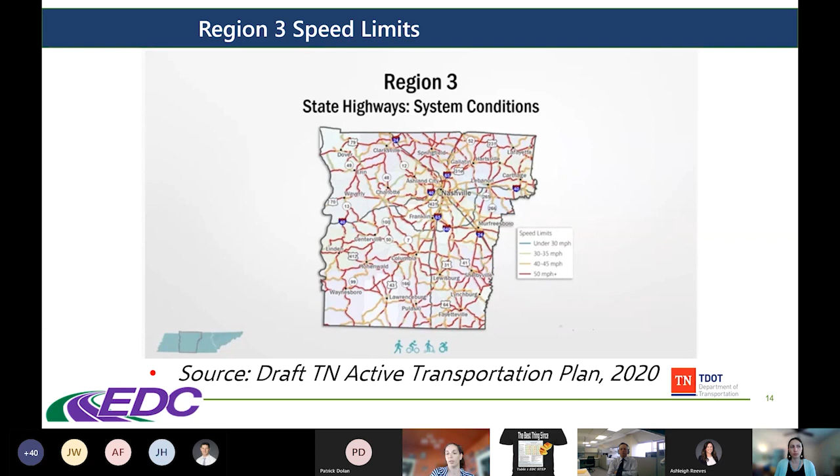TDOT has taken a lot of steps to integrate safety for people who are biking and walking, starting with a multimodal access policy that's been adopted and used throughout the department. It was first adopted in 2010, so about 10 years old now, 10 and a half.

That policy has translated since then into some very specific policies and grant programs, such as the Multimodal Access Grant Program, organized by the multimodal team at TDOT, which gives opportunities to apply for pedestrian or bicyclist safety infrastructure funding at $1 million. The Transportation Alternatives Program was already in place, using federal funding before the Multimodal Access Grant Program, but it's also a really good source for pedestrian safety infrastructure funding, and that is run by TDOT's local programs office.

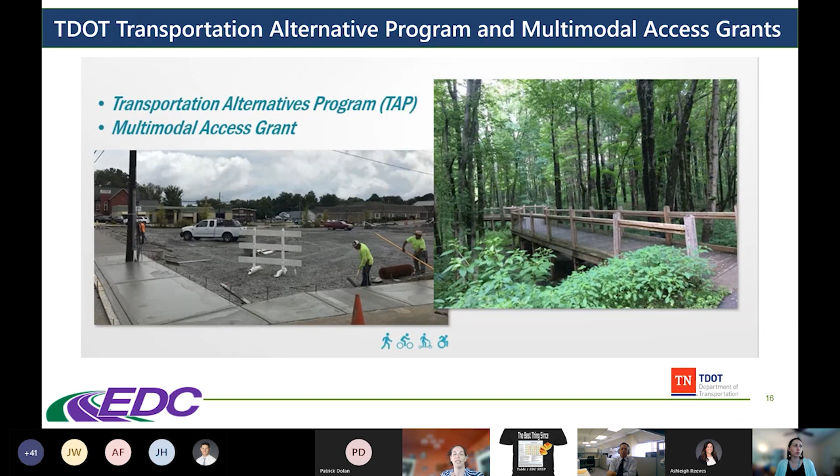TDOT recently, probably 4 years ago, adopted multimodal design guidelines. For every project in development, TDOT staff are looking at bicyclist and pedestrian needs on each and every roadway to determine the appropriate infrastructure for walking and bicycling, and add those into projects from the beginning, which has really made a lot of improvements in the projects coming out from TDOT from the start.

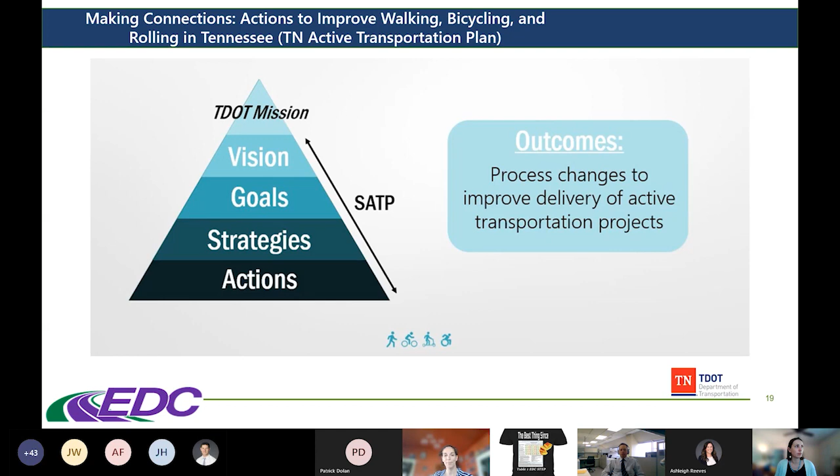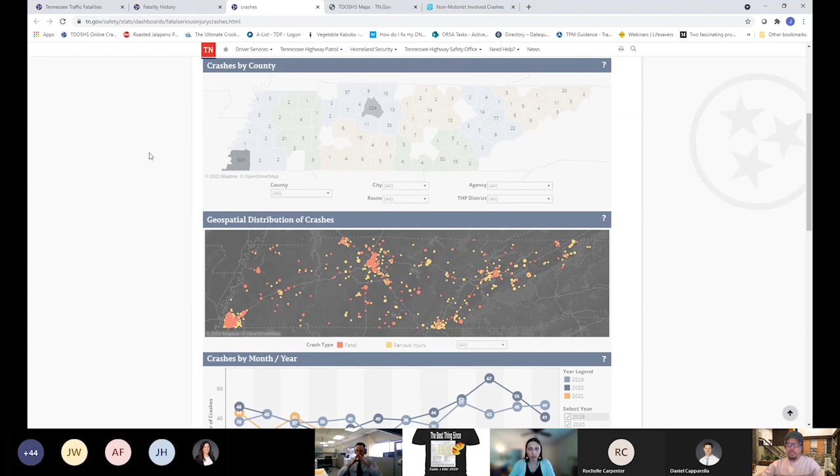So here you can see the distribution of crashes across the state. Again, this is just fatal and serious injury crashes, but you can see they're pretty widely distributed in the rural areas, and concentrated mainly in the urban areas, almost 50%. A little over 48% of the non-motorist crashes occur in Shelby and Davidson counties.

As far as when the crashes are occurring, the trend for 2020, the dark line here, looked a lot like previous years, except in the fall the typical increase was even greater than usual. 2019 looks like a very typical year - the trend stays flat, ticks up through summer and fall, then jumps back down in winter. It remains to be seen how 2021 is going to play out.

February was good to us because we had two ice storms or snowstorms in February. So there was a spate of bad weather in January and February that kept our overall crash numbers from being higher.

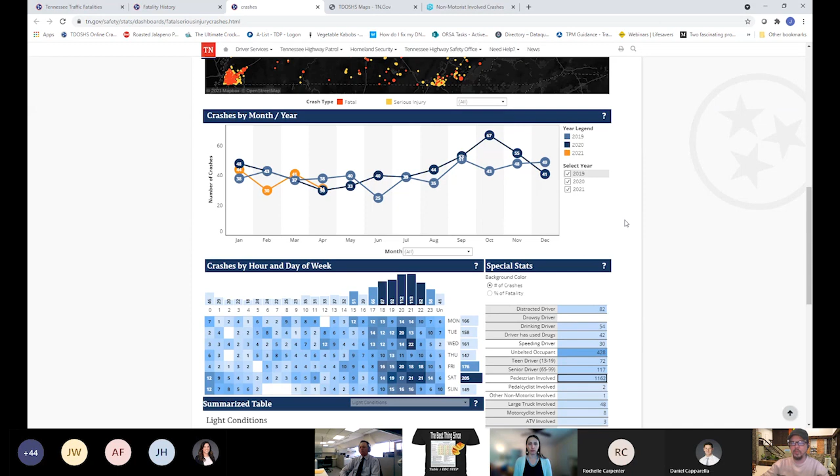You can see by time of day and day of week that most pedestrian crashes occur late in the day and late in the week. That hasn't changed a lot in 2020, though the pandemic changed these trends a little bit.

In 2019, you would have seen a little bit higher uptick in the morning hours between 7 and 9 during rush hour, but the morning rush is almost gone compared to what it used to be. So the evening hours have really been the focus of these crashes lately.

You can see that Friday and Saturday are the highest days, but there are some pretty big chunks on Tuesday and Wednesday where we've had a lot of pedestrian crashes that were fatal or serious injury crashes. I've filtered here at the pedestrian involved, so we're looking at a total of 1,162 crashes.

Some of the other statistics involved in those crashes - distracted driver is fairly high, with 82 of these crashes involving a distracted driver, and 117 involving a senior driver. We've seen that tick up again as folks are getting vaccinated and being able to drive. Senior drivers are becoming more involved in crashes than they were in 2020.

In 54 of the crashes, the driver had been drinking, and in 42 the driver had used drugs. There's some overlap there, so it's not 66 or 96 combined drug and drinking crashes, but there's a pretty big involvement of alcohol and drugs on the driver's part in these crashes.

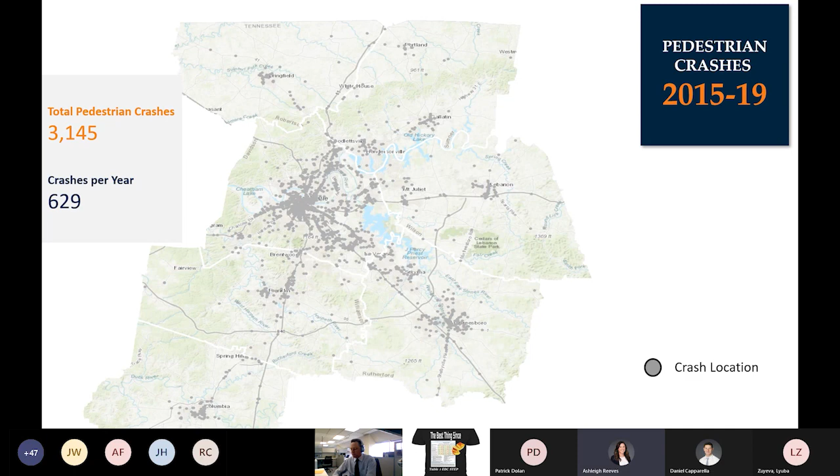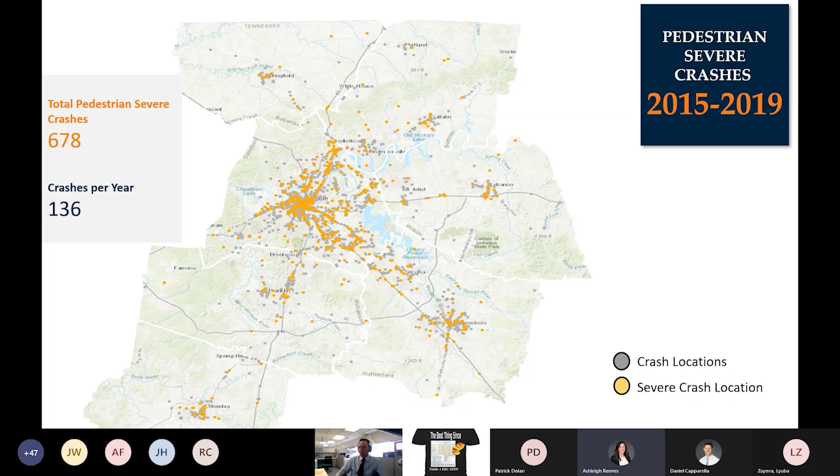Here we're looking at 2015 to 2019, and we're looking at severe crashes, those that resulted in a serious injury or fatality. In those 5 years, we had a total of 678 severe pedestrian crashes, roughly 136 per year. Let's go to the next slide.

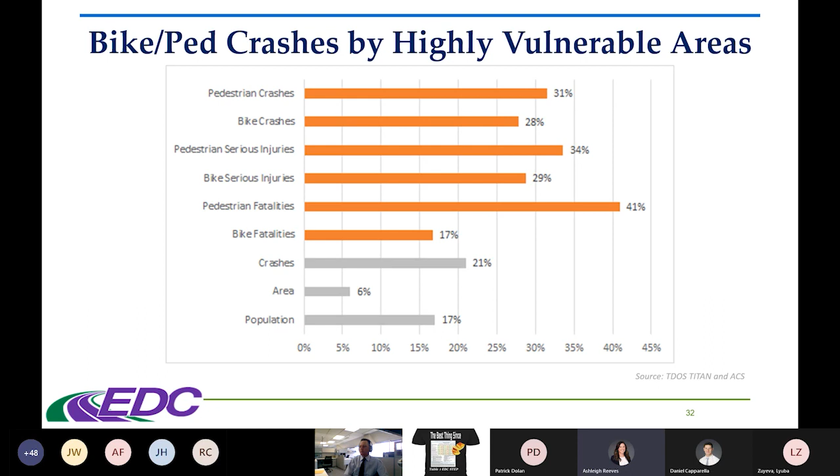And if you go to the next slide. This graph really highlights how pedestrian and even bike crashes occur in areas that are highly vulnerable. HVAs account for 6% of the area in the region, but yet over a third of pedestrian crashes occur in these areas, and over 41% of fatalities. Of the factors included within the HVAs, disabled, racial minority, carless, and poverty contain the largest percentage of pedestrian crashes, respectively. And if you go to the next slide.

We also took a look at proximity to transit stops, and as you can see, there was a disproportionately high number of bike ped crashes occurring within 500 feet of a transit stop.

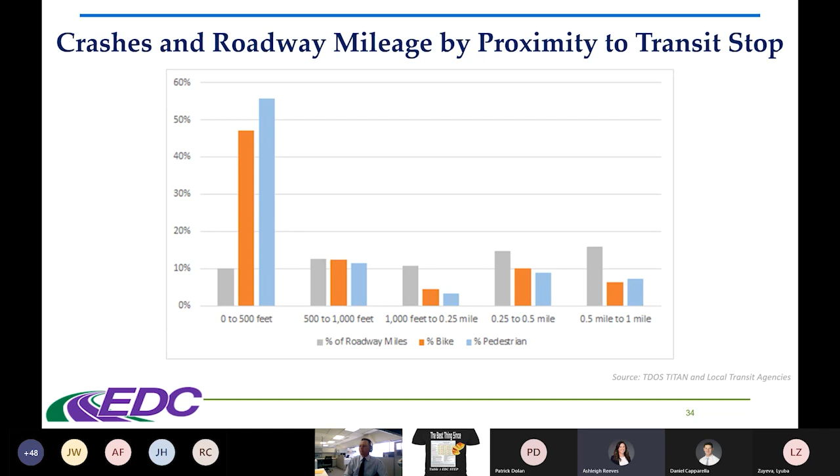We also took a look at functional classification and bike facilities, among a number of other things. We're just highlighting a couple right now. And we found something very interesting that seems to obviously work.

I think I'm turning it over to Daniel to go over some of the safety programs within our region. Thank you, Ashleigh. So you can move on to the next slide.

I'll start by introducing our Bicycle and Pedestrian Advisory Committee, or BPAC. We reconvened our BPAC back in January of 2020 in the midst of our regional transportation plan update. We've met almost monthly since, and it's really turned into a forum for anything active transportation related. We've got planners and elected officials from a few of our local governments, representatives from transit agencies, law enforcement, and advocacy groups for bike ped users and the disability community.

A typical meeting usually consists of discussion of regional and local crash analyses, such as the trends that Ashleigh just discussed, feedback on local, state, and regional bike and pedestrian plans and activities, and we spend a lot of our time collaborating on strategies to address regional active transportation issues.

We adopted our long-range regional transportation plan back in February of this year, but we spent the last year and a half updating and analyzing bike and pedestrian conditions and trends to understand the most important issues and needs for people walking and biking in the region. To do that, we collaborated with the BPAC on what we called BPAC priority areas, which identified where we should be investing in active transportation improvements. The BPAC weighed safety as the most important factor, with health disparities, demand, comfort, and congestion also factoring into the priority areas.

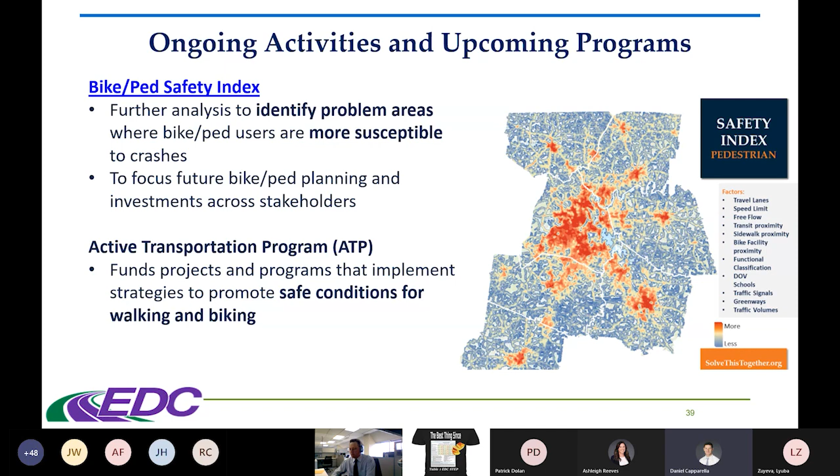As part of our RTP, we also have a grant program called the Active Transportation Program, which funds projects and programs that promote safe conditions for walking and biking. This is funding set aside each RTP cycle, and we hope to have a call for projects this summer for that program, and also hope to use the safety index to help us prioritize projects for that program.

Finally, I'll highlight some of the great work being done locally in our region. Sumner County, for example, recently received funding through the Community Transportation Planning Grant Program facilitated by TDOT for a countywide bike and pedestrian master plan.

Metro Nashville is the first city in the state to do a Vision Zero plan, which they kicked off about a month ago. We hope that plan will set a precedent that pedestrian fatalities are preventable and give us a roadmap for how to move forward with that initiative.

WeGo, Nashville's transit agency, released their Better Bus Plan last year, which includes funding for bus stop improvements and the pedestrian infrastructure associated with them.

In terms of pedestrian safety policies, Nashville and the city of Hendersonville are two of our local communities who have complete streets policies in place, but we know that's something our region needs to work on to encourage the majority of our communities to adopt complete streets policies.

In terms of dedicated funding and local investment in pedestrian safety, WeGo analyzed pedestrian crashes in relation to their bus stops across Nashville and is investing in bus stop improvements to their plan to make it safer for pedestrians to access transit, which we saw was a huge issue from our research across the region.

This has turned into individual projects such as the Nolensville Shelter Project, a location our index also identified as dangerous. Our region has a need for more dedicated funding, especially for pedestrian safety, and that's why we're excited for this workshop so we can start implementing some of these countermeasures and other solutions to improve pedestrian safety across the region. That's all we've got from the regional perspective, and I'll hand it back to Lyuba to continue the presentation.

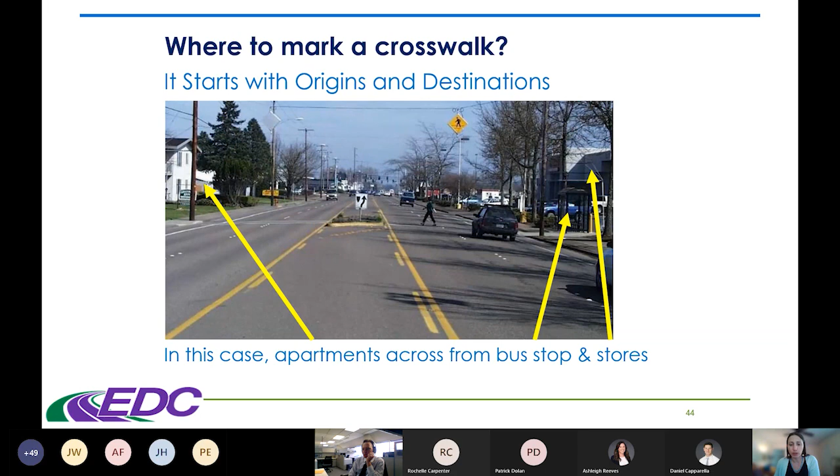So when thinking about where it would make sense to mark a crosswalk, thinking about pedestrian trip generators and activity centers and nodes really helps identify the appropriate pedestrian paths and locations to mark a crosswalk. In this example, we see an apartment complex on one side, a grocery store on the other side, and bus stops. It seems like a pretty logical spot - if you have people trying to get from the apartments to the grocery store, or to the bus stop, anytime a person rides the bus they have to cross the road, either on one leg of their trip or on the return leg. That helps identify potential crossing locations that would make sense to stripe a crosswalk.

We also have to think about human nature. Just because there's a signalized intersection with a marked crosswalk nearby, it doesn't always mean the pedestrian is going to use that location. A lot of times human psychology prefers a clear line, a clear path for walking trips, and also tries to take a shorter trip. It could take an extra 5-10 minutes for a pedestrian to walk out of their way to get to the signalized intersection, where they might also face other conflicts from drivers taking a left or right turn. So there's this perception that you're walking further out of your way to get to the signalized crossing, and you might still not be much safer as a result.

Generally, if a pedestrian sees a clear line of sight and it looks like there's not too many cars, they might spot a good break in traffic. A lot of people will tend to go ahead and take the risk and cross, even if there's not a signed crosswalk. In reviewing some of the data earlier, you've seen there's a preponderance towards males being involved in injury crashes, pedestrian crashes.

So again, just human nature, not just guys, right? Women do too, but sometimes when we see a clear path, clear line of sight, that's where the human mind gravitates towards trying to cross there.

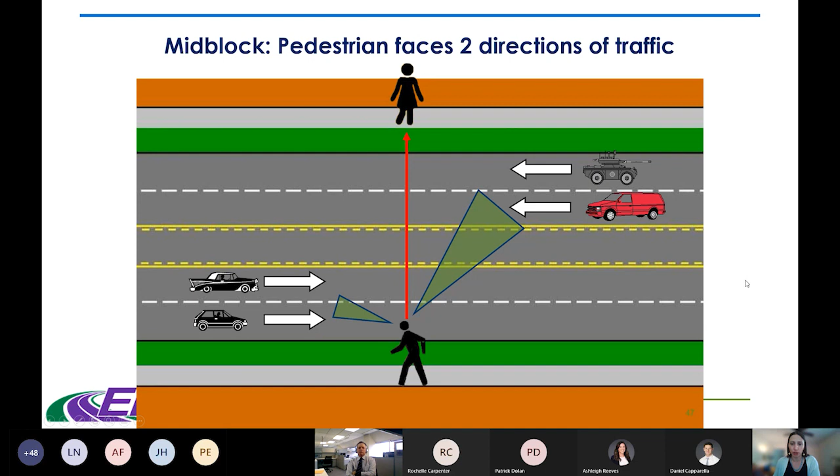This slide illustrates some of the conflicts and threats a pedestrian has to evaluate when navigating a mid-block crossing. In this case, we're dealing with a 5-lane arterial with a 2-way left turn lane. For a pedestrian, it's a challenge to pay attention in both directions - they have to look left, look right, and find a break in traffic that accommodates their trip in both directions. So there's that mental challenge of navigating conflicts from both directions.

But if you think about a pedestrian trying to cross at an intersection, there are going to be some conflicts too. A pedestrian has to pay attention to cars that might be turning right in front of their path - they might not see them right away. They also have to pay attention to vehicles turning left in front of their path and not seeing them immediately. So some of those can also be a challenge, even though there might be a pedestrian signal phase and pedestrian crossing markings.

Going back to 2005, there was research published that looked at the effects of marked versus unmarked crosswalks at uncontrolled locations. They primarily looked at both 2-lane and multi-lane roadways, and also looked at differences by speed, number of lanes, and median versus no median. For 2-lane roads, there was no significant difference in crash rate at marked versus unmarked crosswalk locations. On multi-lane roadways with 3 or more lanes, there was a difference based on traffic volumes and presence of median.

So looking at multi-lane roadways under 12,000 vehicles per day, there was no significant difference in crash rate between marked versus unmarked crosswalk locations. Over 12,000 vehicles per day without a median, crashes at marked crosswalk locations exceeded crashes at unmarked crosswalk locations. And over 15,000 vehicles per day with medians, crashes at marked locations also exceeded crashes at unmarked crosswalk locations.

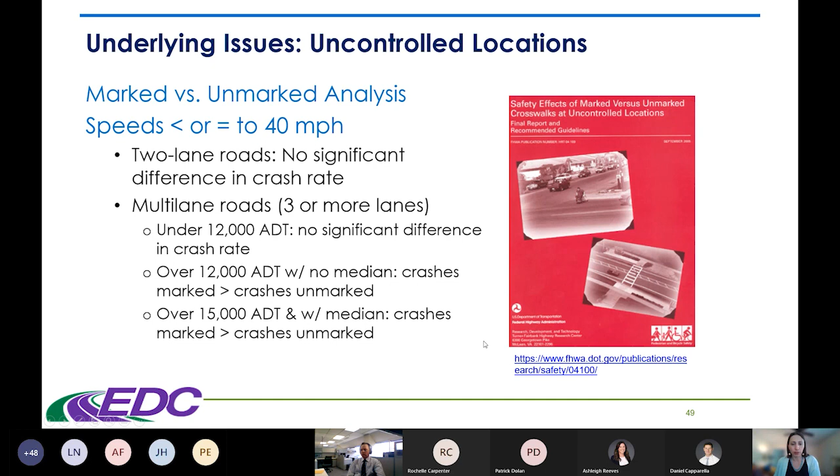There's also an underlying factor that might be involved in this increased crash rate, and that has to do with multiple threat crashes. What happens is if there is a marked crosswalk, the driver in the right lane might stop for the pedestrian crosswalk, but the driver approaching in the next lane might not be able to see the pedestrian behind the stopped vehicle, and might not realize that the vehicle in the right lane is stopped for the crosswalk. They're likely to proceed, and then they'd be nearing the crosswalk right around the same time as the pedestrian is getting to that point in their crossing. So this multiple threat crash situation does occur. There are ways to remedy it with advanced stop line or advanced yield markings, and we'll talk about it more in the future.

Rochelle talked a bit earlier about travel speeds and the effect on survival statistics. In addition to having an impact on how likely pedestrians are to survive crashes, travel speed also makes a huge difference for stopping sight distance. If a driver is traveling faster, they're going to need a lot more distance to have the full length to react to seeing a pedestrian or seeing the crosswalk markings, start applying the brakes, and actually come to a reasonably complete stop.

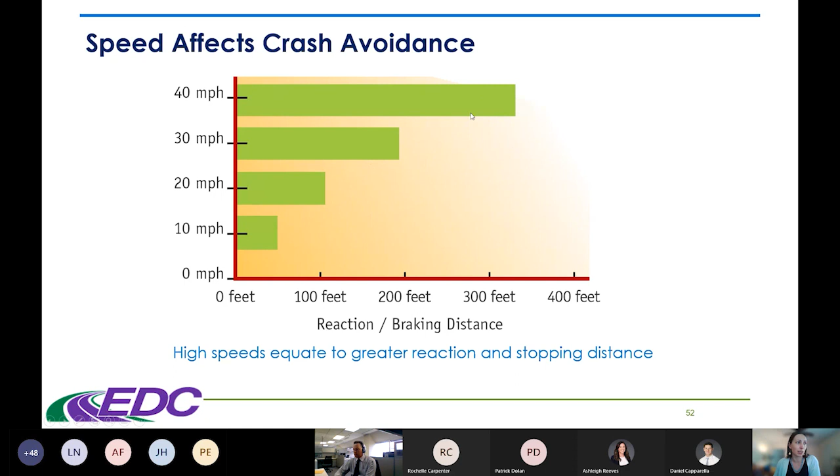So when you're talking about 20 miles per hour, it might take 100 feet to fully react to a crosswalk or a pedestrian in the crosswalk and come to a full stop. And at 40 miles per hour, you're looking at almost 350 feet for the full reaction braking distance. This longer distance means we need a lot more additional supports on multi-lane high-speed arterials where drivers are likely traveling at higher speeds. We need to give them a lot more warning so drivers know something's coming up and can react in time. Otherwise, it's just not enough distance if they only see the warning sign right in front of the crosswalk and it doesn't give them enough notice to start reacting 350 feet up the road.

The Manual on Uniform Traffic Control Devices does have some guidance on signing versus non-signing crosswalks. There's not a warrant required to add marked crosswalks. However, there's some guidance that suggests that in some situations, a marked crosswalk alone is probably not sufficient.

The specific language indicates that marked crosswalks alone, without other measures designed to reduce traffic speeds, shorten crossing distances, enhance driver awareness of the crossing, and/or provide active warning of pedestrian presence, should not be installed across uncontrolled roadways where the speed limit exceeds 40 miles per hour and/or either those roadways have 4 or more lanes without a raised median or island and an ADT of 12,000 vehicles per day or more, or 4 or more lanes with a raised median island and an ADT of 15,000 vehicles or more.

So that kind of reflects back on that study from 2005 that we've also referenced. And again, this guidance from the MUTCD does not suggest that it's not important to mark a crosswalk, but it does suggest that in some locations and situations, additional safety measures are needed. So as part of the STEP workshop, we'll be reviewing those 7 countermeasures that provide additional potential elements to help enhance the conspicuity of those crosswalks, make them more visible to drivers, and give drivers more opportunity to see them in advance, react, and come to a complete stop.

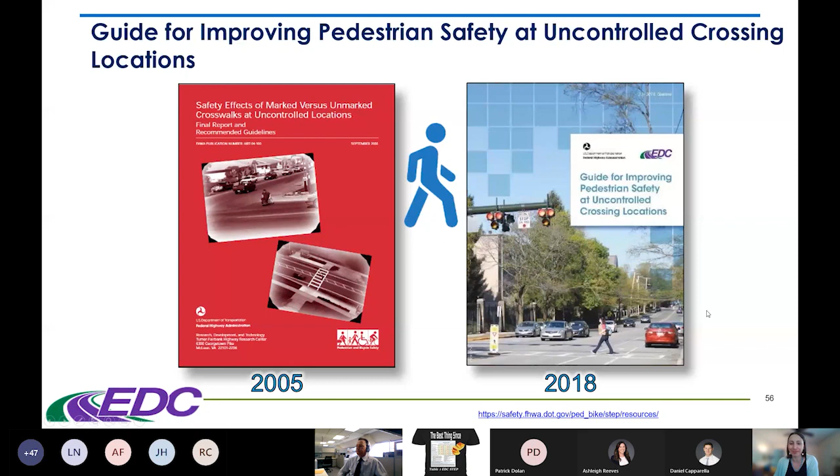In addition to this lovely Table 1 with countermeasures, the guide also walks you through the process of selecting the best countermeasures. Similar to many planning processes, you would start by collecting the data. Next we're going to review some of the steps involved in identifying and selecting the most appropriate countermeasure for a given situation.

Step 1: collect the data and engage the public. Of course, you want to look at your pedestrian crash and safety data, and it sounds like the MPO has already done a lot of that work for your region. You also have the dashboard interactive tool available for the state of Tennessee. So if you're with a local municipality in this region, you already have access to some of those great tools and resources. And if you need to look at your crash statistics, you can go find the data.

You'd also want to evaluate your pedestrian accommodation policies, what's happening with locally adopted plans and zoning regulations. You could consider initiating a pedestrian safety action plan, which could be done at a regional or municipal level. You probably also want to review your pedestrian traffic safety plans.

As an optional tool, you could also conduct a walkability audit, bringing a group of professionals out into the field, preferably in interdisciplinary teams so a variety of perspectives are represented, and actually walking the corridor to look at the location on the ground. Sometimes you can really see in real life features and details that are less obvious from a Google Street View review—maybe a bush obstructing visibility for drivers, a lighting issue, or something else that's harder to read just from looking at aerial views.

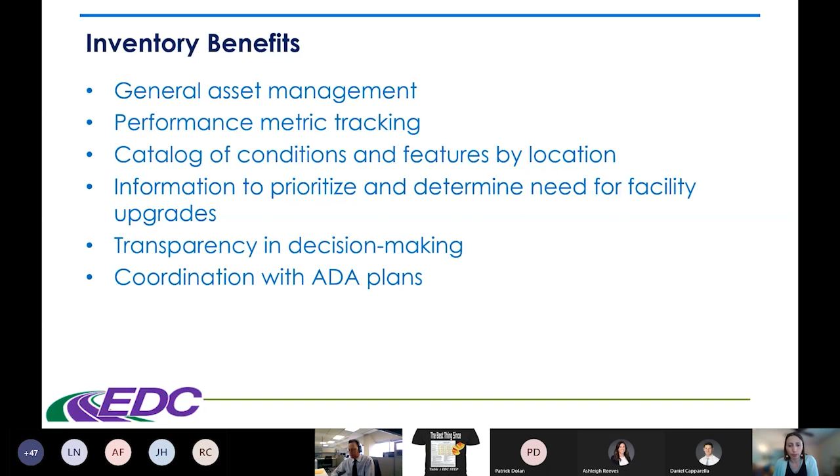Maybe if you already had some sort of beacon or rectangular rapid-flashing beacon, there's some maintenance issue with the lights not flashing correctly. So having a good inventory provides you with that baseline analysis, and you can keep track of it over time better.

If you don't already have a local, regional, or statewide inventory applicable to your location, and you're trying to collect data from scratch, the STEP field guide could be a helpful resource, providing specific questions you'd want to ask and address as part of collecting your data. It asks about land use context, location, nearby destinations, roadway features such as speed and volume, crosswalk features like markings, signs, beacons, and signals.

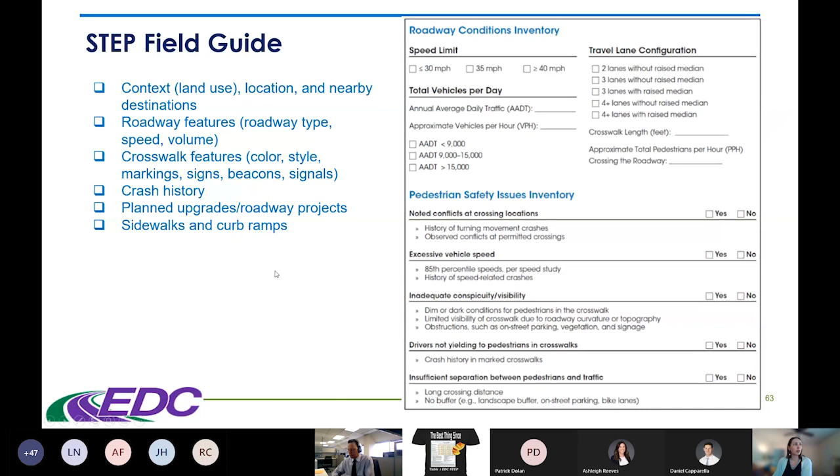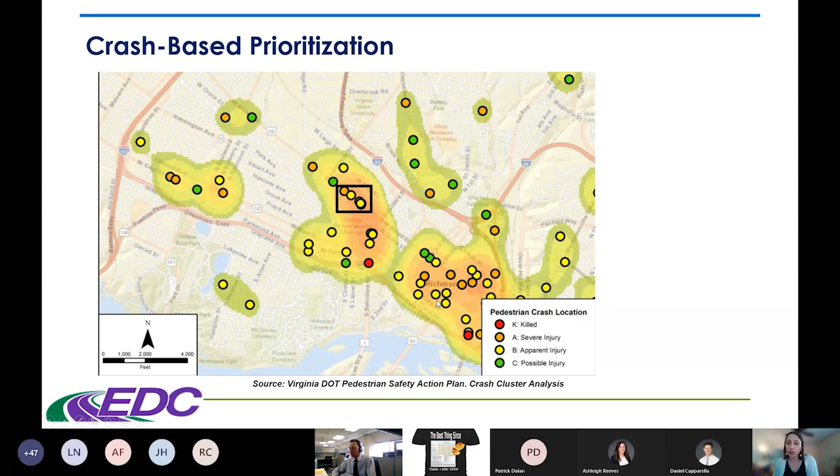Once you have your data analyzed or compiled, you can look at prioritizing your spot locations based on crashes. This map illustrates a heat map that helps identify concentrations, those priority areas based on fatality and severe injury crashes. Here, red dots are fatalities and orange dots are severe injury pedestrian crashes, for example, from Richmond, Virginia. You can see how certain locations and corridors tend to pop up once you do this heat mapping of pedestrian crashes.

We'll talk a little more about the systemic approach to safety. It sounds like this has already occurred in this region, so kudos to the local team. There's a great guidance document out there, NCHRP 893, that you can download online if you want to do more systemic pedestrian safety analysis. Systemic improvement is generally widely implemented based on high-risk roadway features that are correlated with particular crash types rather than crash frequency. The systemic approach is more proactive, risk-based, data-driven, and is a process.

Similar to the countermeasure selection process we've discussed, the systemic approach to safety has its own series of 6 steps, somewhat similar but a little different. You start with defining the study scope - are you looking at the whole region, just a county, a city, or a particular corridor? Then you would compile your baseline data.

You look at determining the risk factors, which often involves statistical analysis. If you haven't done this type of data analysis in the past, it might be helpful to recruit researchers experienced with statistical analysis, maybe partnering with your local university. The next steps would be to identify potential treatment sites, select potential countermeasures, and then refine and implement the treatment plan.

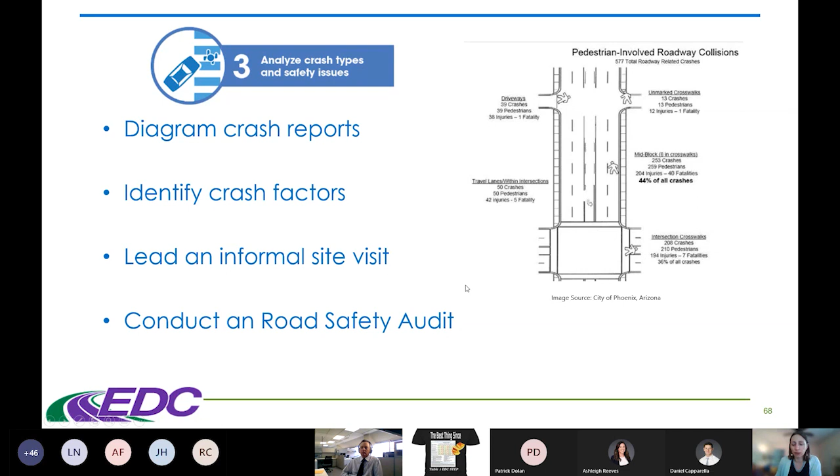With the road safety audit, there's additional guidance available from Federal Highways that identifies some typical steps. You'd start with formulating your RSA team, but also identifying who's actually the project owner—is the local municipality the agency driving this roadway safety audit? Is it the MPO? Is it the DOT? Who is in charge, basically? And then who's involved in this team?

You identify specific projects that you're looking at, set up a starting meeting, and then perform the field review, analyze report and findings, present those findings to the project owner, prepare a formal response, and incorporate findings.

One of the advantages of doing a formal RSA is that even as a formal process, it can still be relatively quick, done over the course of 2 to 3 months. So you end up with a concise document that indicates safety issues, and the recommendations for addressing them can be easily folded into your future planning processes.

For example, if the MPO is updating the long-range plan, or the municipality is updating its comprehensive plan or bicycle and pedestrian plan, you can look at the RSA findings and incorporate them to help prioritize projects in those regional and local plans. So RSAs can be done relatively quickly and can be a helpful additional part of the process to identify needed countermeasures for a particular location.

All right, so moving on. Once you've selected your countermeasure, there's a variety of design guidance to help you actually design this particular treatment. The MUTCD, of course, is in the process of being updated, and there might be some small changes, for example, related to pedestrian hybrid beacons. But right now, the MUTCD is what it is. I believe the latest version is from 2009, so it has parts to deal with signage, markings, highway traffic signals.

You also have the AASHTO guide for the design of pedestrian facilities. And then there's a variety of other guidance documents such as PedSafe, Guide for Improving Pedestrian Safety at Uncontrolled Crossing Locations, which is what we're reviewing through the training today, and some additional guidance. Out of those guidance materials, the MUTCD can be downloaded for free.

The AASHTO guide does require a fee to download and use, but hopefully if you have a group of professionals who are going to be using it in your office, ideally it makes sense to have at least one version for the group to share. I think with electronic resources it's getting tricky too, you kind of have to have a different license for each user.

But there's a view of some of those additional guidance materials that are available from agencies such as Federal Highways, NHTSA, AASHTO, ITE, PBIC - Pedestrian Bicycle Information Center. For example, there's a pedestrian safety guide for transit agencies. As we've already talked about today, there does seem to be this link between bus stop locations on multi-lane arterials and prevalence of pedestrian crashes. Tends to be one of those safety issues.

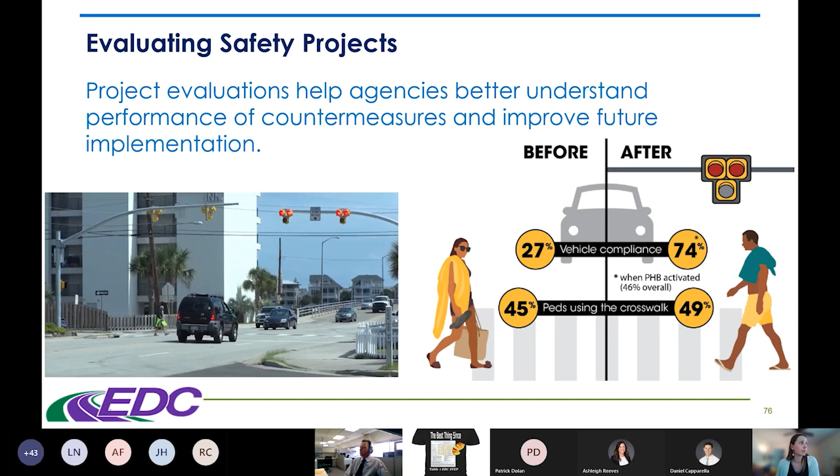All right, so that brings us to the next section where we're going to be talking about those specific seven countermeasures, the spectacular seven as they're sometimes referred to. I want to take a break and see if there are any comments or questions that have emerged. Does anybody have a burning question or a comment you'd like to share based on everything you've heard so far? Any locations that jump out to you and say, hey, do something here, this is really a hot spot? Feel free to add a chat box comment or speak up if you have any particular thoughts you'd like to share with the group before we jump into the next section.

Luba, there was a question about the MUTCD update, helping to simplify the crosswalk application. I'm not sure if you saw that or not.

Yeah, the MUTCD is kind of a moving target right now. Peter, I'm not sure if you'd care to add a comment about the MUTCD changes, since there's just so much there. Yeah, and since it is under the notice of proposed amendments right now, we can't say too much, but I think the question was really more that I needed some clarification on exactly the crosswalk applications. Sounds like they're wanting to simplify it, so I needed a little more detail. Ross, if you want to maybe just quickly describe a little more of what you're trying to say or ask, because right now it is engineering judgment as far as the crosswalk placement, whether you put in a crosswalk or not. Maybe you can give us a little clarification on the question.

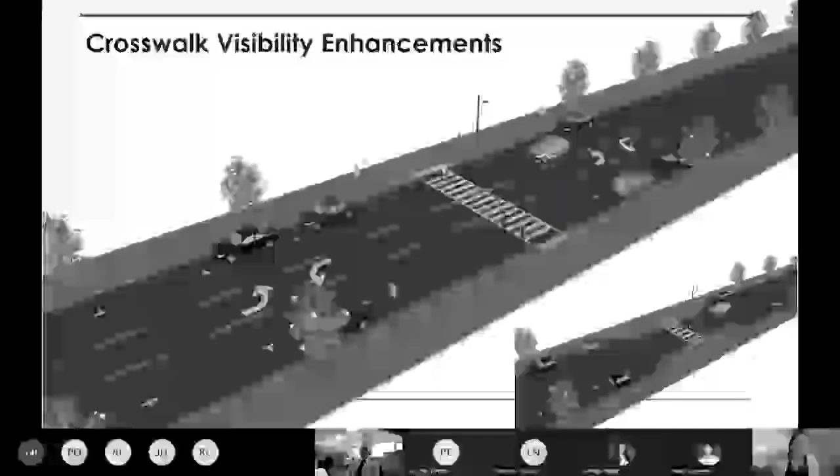This graphic illustrates some of those elements we've already talked about. Again, you have the continental style crosswalk markings across the crosswalk. You have the pedestrian crosswalk warning sign right here with an arrow pointing to where the crosswalk is. You have the pedestrian scale lighting, one on each side — not directly over top of the crosswalk, but rather to the side.

You have this area that's protected from parking on both approaches to make sure drivers are not parked and obscuring the crosswalk from the driver. And then down below in the smaller graphic, you'll also see an example where there is a curb bulb-out situation that also helps shorten the pedestrian crossing path and makes the crosswalk even more visible to the driver.

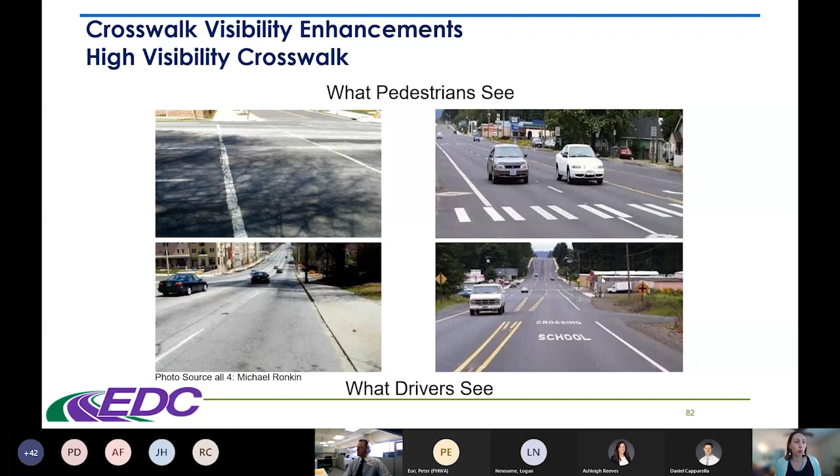Pedestrian warning signs used to be yellow, and more recently fluorescent green has been recommended for more visibility. These pedestrian warning signs may be used to alert road users in advance of locations where unexpected entries into the roadway might occur, or where shared use of the roadway by pedestrians, animals, or equestrians might occur.

This deals with a situation where drivers need a little more advanced notice. Just having the warning sign at the crosswalk location itself isn't sufficient based on higher speeds, or maybe they're going around a curve and something is obscuring their line of sight to the crosswalk. In that case, you can add an advanced warning sign before the driver gets to the crosswalk, with a flag that says 'ahead'.

Advanced yield markings are another feature that can help support crosswalk safety by reducing multiple threat crash likelihood. Advanced or 'stop here' versus 'yield here' for pedestrians in crosswalks varies state by state. In Tennessee, I believe you're in a yield-to-pedestrians-in-crosswalk state, so a 'yield here to pedestrian' sign would be used to support the shark's teeth markings for advanced yield to pedestrian crosswalks.

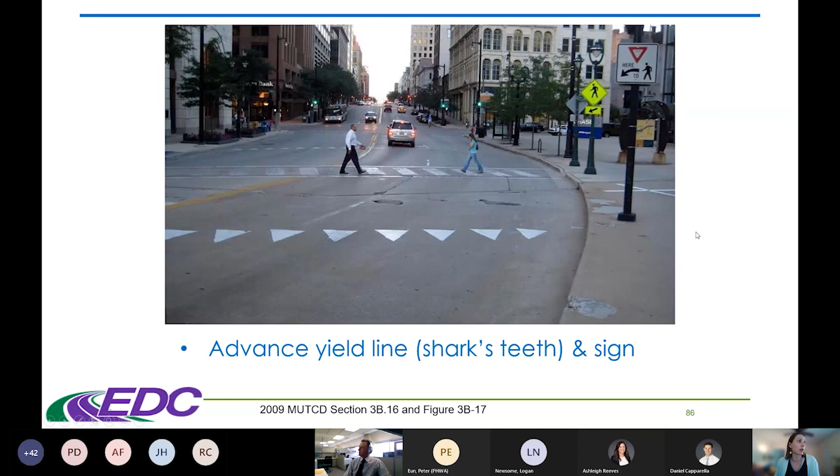This is an illustration of what advanced yield markings look like. The shark's teeth applied to the roadway, then you have the yield-here-to-pedestrian sign, plus an additional warning sign with an arrow right next to the crosswalk, continental stripes, and some pedestrian scale lighting. All of these features in combination can make the crosswalk more conspicuous and easier for drivers to see.

In-street pedestrian signs, depending on state law, use a yield-to-pedestrians or stop-for-pedestrians sign—here it's yield to pedestrians in crosswalk. They go in the middle of the road, and are designed to be breakaway unless you have a median island, since otherwise they're physically elevated out of the roadway space at grade. You have to think about maintenance issues, since breakaway signs will likely need replacing over time, but they're a relatively inexpensive treatment that's effective at improving crosswalk visibility and safety.

Curb extensions, as already mentioned, can also contribute to crosswalk visibility and make the crossing experience more comfortable for pedestrians. In this case, the width of the parking lanes was utilized to create this bulb out, which also gives you a nice area for street furniture, maybe bicycle parking or a bench, and parking would stop on approach to the curb bulb out. If you have a bike lane, make sure the pedestrian curb bulb out doesn't obstruct it—the bicycle lane should still have clear right of way.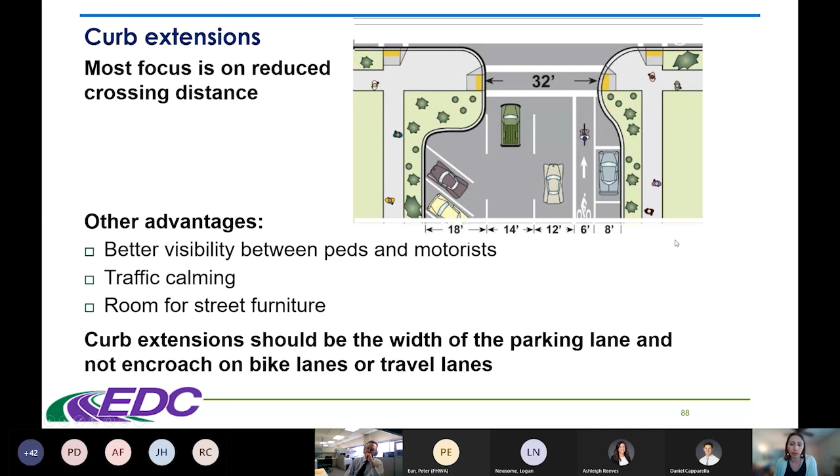In some cases, putting in a curb bulb out is simply not appropriate for that location. In that case, you can still improve crosswalk visibility by removing parked cars on approach to the crosswalk. This blue car can obscure the driver's line of sight, so you would mark that area in advance of the crosswalk as a parking restriction.

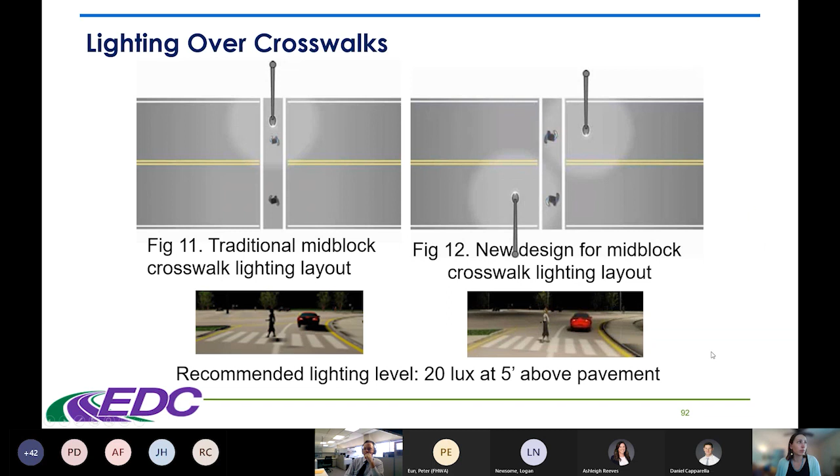This high visibility crosswalk can be paired up with any number of the other pedestrian countermeasure improvements we'll be reviewing today. So the next improvement we'll talk about is a raised crosswalk. A raised crosswalk can be quite successful, but it's not appropriate for all locations.

With a raised crosswalk, the pedestrian walkway stays in line with the sidewalk, and it elevates the roadway for the driver—so the driver has to come up to a higher elevation, then come back down across it. It's almost like a speed table, this elevated or raised crosswalk.

You'll still see warning strips on approach to the crosswalk. It's important for a visually impaired pedestrian to determine that they're actually leaving the safe sidewalk space and stepping out into the road—even though the crosswalk is elevated, they're still effectively stepping out into the road. So it's important to alert them with those pedestrian warning strips. You still have some high visibility crosswalk features too, with warning signs, in-roadway signs, and pedestrian scale lighting.

So some of the other features still apply. Something to note for raised crosswalks is that they're not appropriate for all locations and situations. They're more appropriate for lower speed 2 to 3 lane roadways where speed limits are 30 miles per hour or less, with vehicular volumes less than 9,000 vehicles per day. So it might be a minor collector or more of a neighborhood street, maybe with schools or other neighborhood destinations where people are trying to cross, not a high-speed multi-lane arterial situation like some of the other countermeasures.

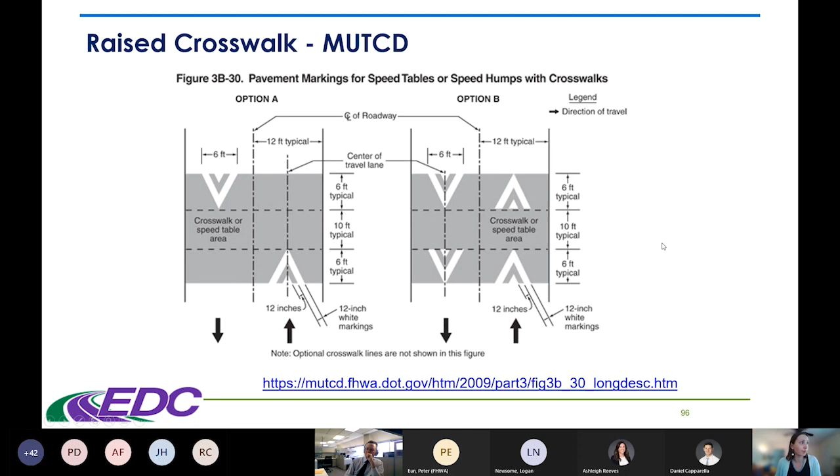The MUTCD has specific guidance regarding the signage and markings with the raised crosswalk, including how to implement chevrons and the width across the top of the crosswalk table, about 10 feet. All that information is available in the MUTCD.

Again, as already mentioned, you'd want to consult with emergency responders in the area, and think about whether there's a consideration for snow plowing or other maintenance issues that might come up. Drainage could be a consideration too—are you going to need additional drainage features installed as part of this raised crosswalk? And there's a concern that several raised crosswalks in succession could be quite disruptive to traffic.

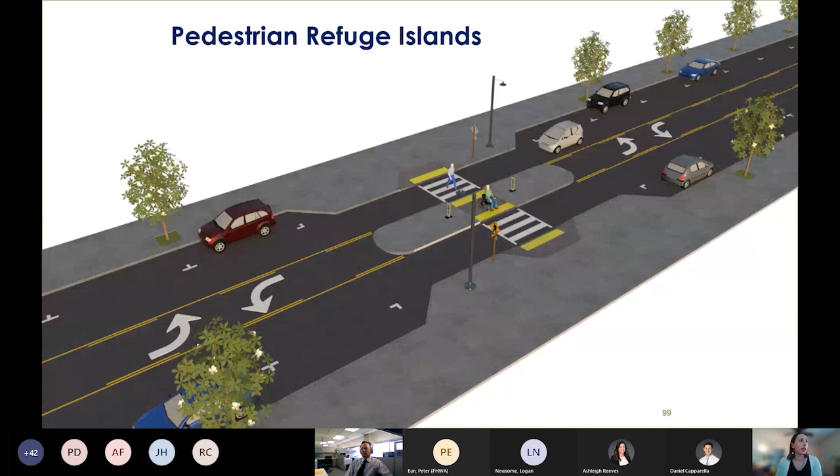Next we're going to talk about a pedestrian refuge island. You've already seen some of those in the previous graphics and in that Nashville example Rochelle talked about, Nolensville Pike I believe. A pedestrian refuge island can help improve the safety of your crosswalk by breaking up the decision for the pedestrian—they only have to pay attention to one direction of travel at a time, which makes it easier for them.

There are some width and length considerations with pedestrian refuge islands. You want it to be at least 20 feet long in the direction of travel, making it substantial enough for drivers to notice. You also want the width across the pedestrian path to be at least 6 feet wide, though in some locations a much wider path is appropriate—for example, a greenway or popular trail crossing, a busy downtown intersection with lots of pedestrians, or a variety of scooters and other users. In some cases 6 feet is not enough and you'd want to make it wider, but 6 feet is the starting width.

Generally if you have at least 2 feet of clear space between the tactile warning strips, you can usually provide the tactile warning strips in that median refuge island. If the median refuge is so narrow that you don't have enough width to add the warning strips and still have 2 feet of clear width, the recommendation is to not add those warning strips in the median refuge island—just keep it flat and level so it's ADA accessible.

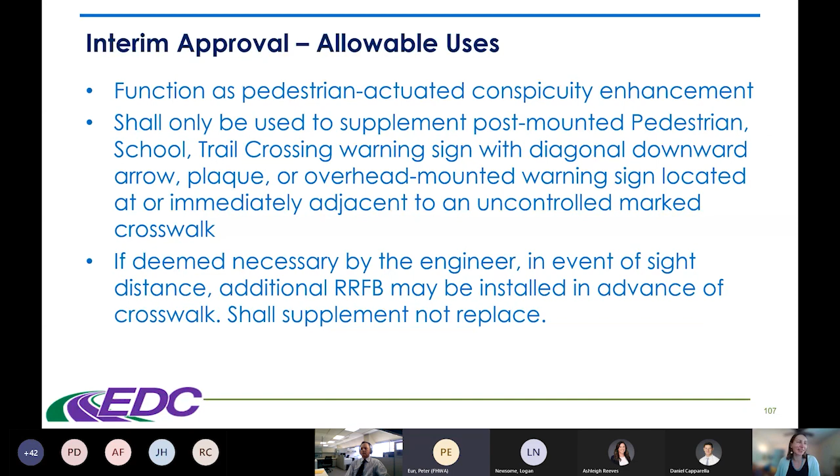As an example of a case study where RRFBs were successfully implemented and their effectiveness was monitored, Arlington County, Virginia implemented an enhanced pedestrian crossing with rapid flashing beacons, and they saw a 15% reduction in speeding, a 110% increase in driver yielding behavior up to 70%, and an overall increase in use by pedestrians for the crosswalk location. So generally they found this crosswalk enhancement was an effective tactic.

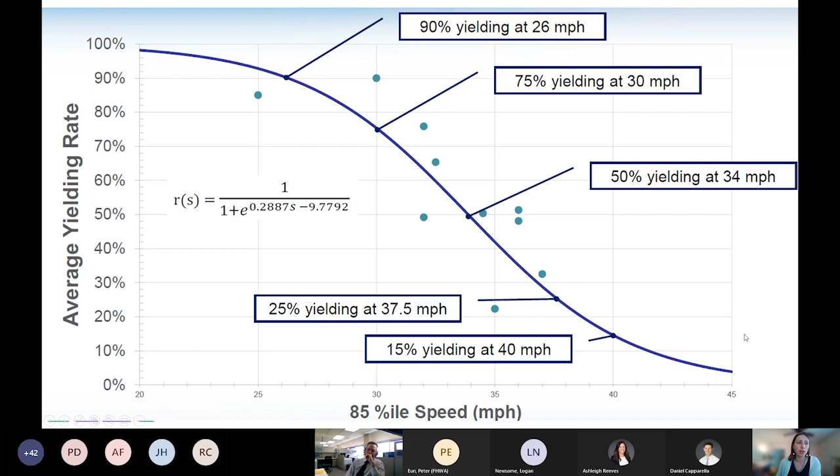There is some data indicating that driver yielding behavior varies based on speed. It illustrates 85th percentile speed versus the percentage of drivers likely to yield. Once you get above 30, 35 miles per hour, the driver yielding behavior really drops off, from 50% of drivers likely to yield at 34 miles per hour down to maybe only 15% yielding at 40 miles per hour. So in your evaluation of the roadway characteristics, it might be nice to think about what else can be done - maybe a rapid rectangular flashing beacon isn't sufficient for higher speed situations, so that's where a pedestrian hybrid beacon might be more appropriate.

So that's our next Spectacular 7 feature. I'm cognizant of time, so I'm going to go through the next two a little bit quicker.

A pedestrian hybrid beacon typically is mounted on mast arms overhead above the roadway and crosswalk. It's usually a good idea to pair it with high visibility crosswalk markings and features, including lighting and continental striping. When not activated, a pedestrian hybrid beacon has its three light faces blank, until a pedestrian activates the beacon.

This illustrates the sequence of lighting: it starts out blank, with a red don't walk for pedestrians. It goes to flashing yellow when the pedestrian pushes the button to request the beacon. It goes to steady yellow, indicating drivers should slow down and stop. Then it goes to steady red, where drivers are expected to stop and wait for pedestrians to cross while pedestrians get the green walk signal. At some point, the beacon goes to the wigwag pattern, where two red lights flash across the top, and pedestrians have a countdown timer to finish crossing. Then the beacon returns to a blank face condition and pedestrians have a don't walk sign.

Pedestrian hybrid beacons have been found to be pretty effective in reducing pedestrian crashes where implemented, reducing vehicle and pedestrian crashes by 55%.

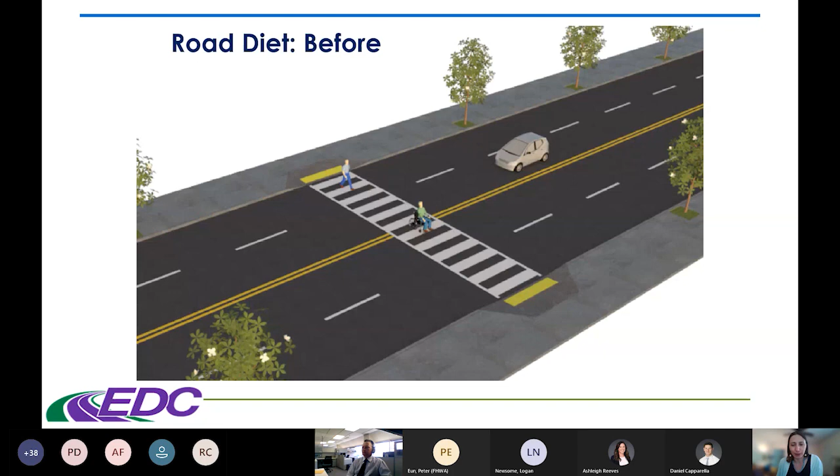So, road diets—I'm going to go through these quickly and come back to LPIs tomorrow since we're at 2 p.m. A road diet can be an effective tool when you have roadways with volumes that are not quite enough to warrant a 4-lane roadway. In this illustration, a 4-lane roadway was reduced down to 3 lanes with an alternating left turn lane in the middle.

High visibility crosswalk markings were added. A pedestrian refuge island can still be paired with a road diet, using the alternating left turn lane in the middle for a median refuge island. It also gives you space to provide a bicycle lane once you do the road diet—so it can have a combination of multiple benefits for a variety of users.

So why would you do a road diet? Generally it reduces multiple threat crash types for pedestrians, makes it easier for pedestrians to cross with a median refuge island in two simple steps, and reduces the crossing distance. For bicyclists, it also has the benefit that you might be able to implement a bike lane. There are specific guidance documents from Federal Highways, including the Road Diet Informational Guide and Road Diet Case Studies.

Thinking about case studies is really interesting in reviewing how different agencies treat road diets across the country. We're seeing quite a difference, but generally somewhere between 15,000 to 20,000 vehicles per day on a roadway is considered a safe zone to implement a road diet from 4 lanes to 3 lanes.

But different agencies treat it slightly differently and might require different types of analysis. For example, level of service analysis might be required in New Mexico and Kentucky, but might not be required in Virginia.

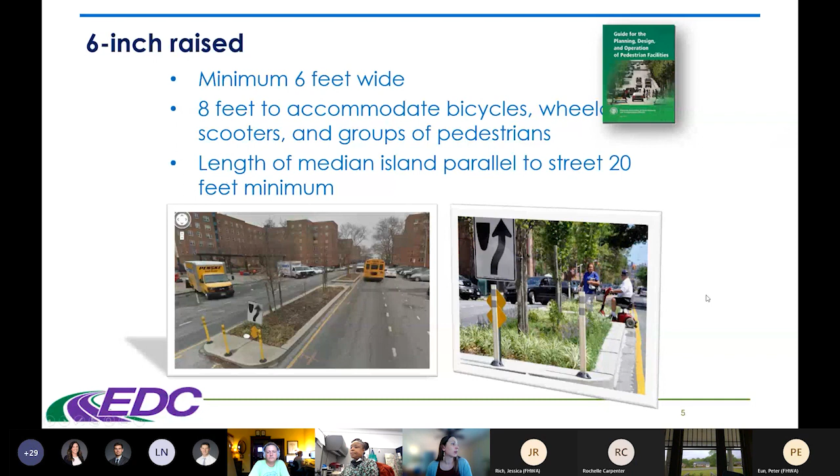This again talks about the width in the middle between the detectable warning strips. When there's not enough width, you would not add those detectable warning strips in the island. So that 2-foot gap is needed.

To talk a little bit more about the grade of that space in the middle of the median refuge island: you want that area to be flat, at street grade, and at least 2 feet across, then 6 feet wide. In some cases wider, depending on how large a group of pedestrians you're expecting to accommodate on a regular basis.

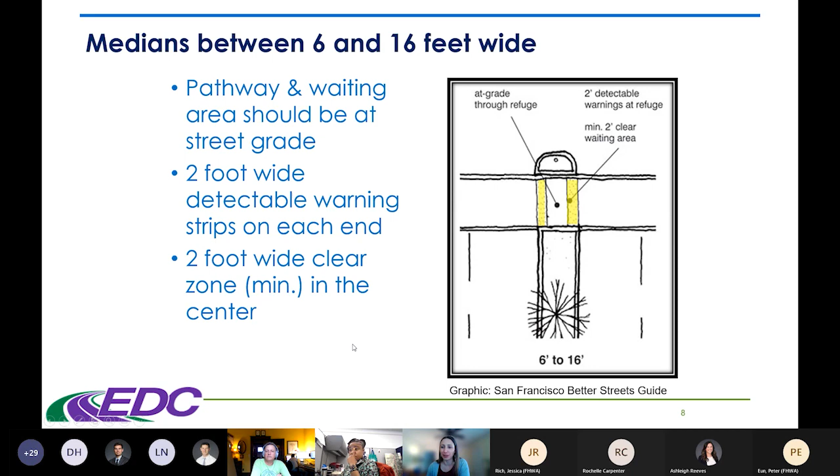This shows a little bit of landscaping. You want to be careful with landscaping so it's not actually obstructing the view of the drivers or pedestrians in the median refuge island.

You want to allow pedestrians to enter the island at the same angle in which they were walking, and then reorient them gently in the direction they would need to look to see if there's oncoming traffic or traffic conflicting with that movement.

Just to talk a little more about landscaping: some landscaping can be nice and aesthetically pleasing, but you want to be really careful with some of those taller shrubs. The point is adding pedestrian safety. You don't want super tall grass or shrubs obstructing the view of the driver.

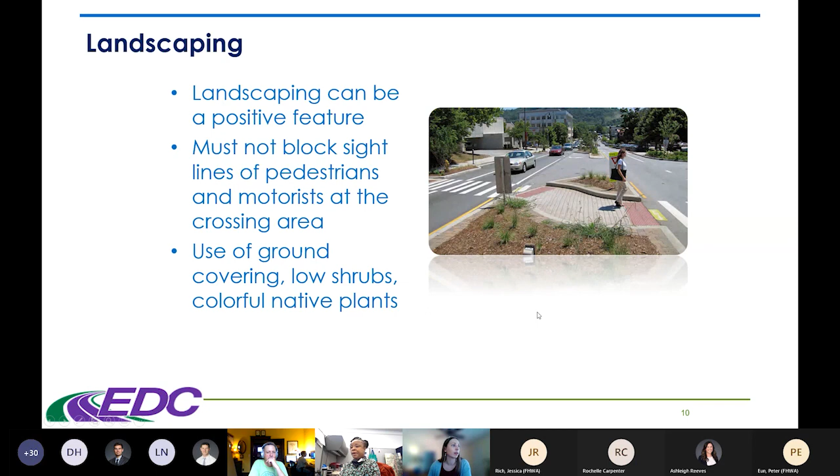And of course, it's going to be hard to maintain certain plants. They're going to get some of the debris, some of the salt in the winter if you're putting salt down on your roads.

This is an example of a hardscaped median refuge island or splitter island, an approach to a roundabout. Some brick pavers can be used to add aesthetic elements without necessarily using landscaping.

An example of a median refuge island implemented successfully was from Phoenix, Arizona, at West Van Buren Street, where there was about a half-mile distance between signalized intersections, a pretty high volume, high speed roadway. There was a marked crosswalk at this unsignalized intersection, and a community center just a few steps down the road.

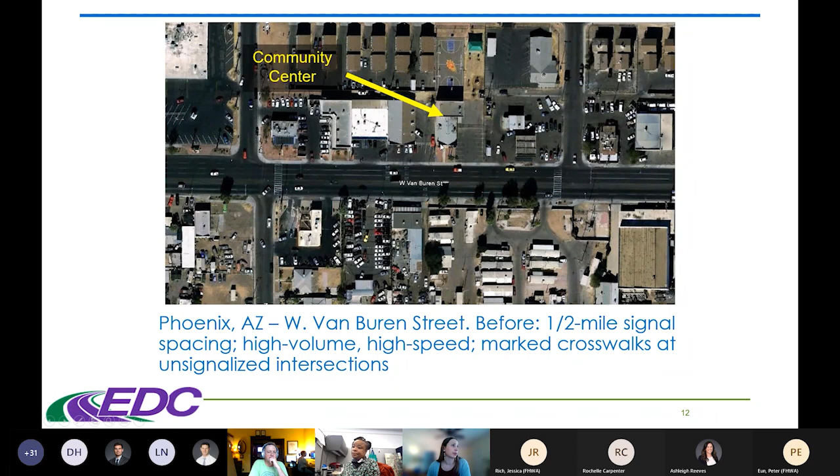This is what the crosswalk looked like beforehand. It had continental crosswalk markings, but it was not super visible to drivers, so kind of a no-frills, basic striped crosswalk. This is the community center. The number of lanes was 6 lanes to cross for pedestrians, so a pretty wide roadway to cross, and challenging.

The local jurisdiction was able to implement this median refuge island. They moved the crosswalk closer to the community center, breaking up the crosswalk with the median refuge island in between. They added advanced stop lines on approach to the crosswalk, and made the median refuge island longer, forcing pedestrians to change their angle of travel to look at traffic coming from the other direction.

The advanced stop lines are not visible in this photo, but they were added. This also gets pedestrians closer to the community center for those trips being taken to get there.

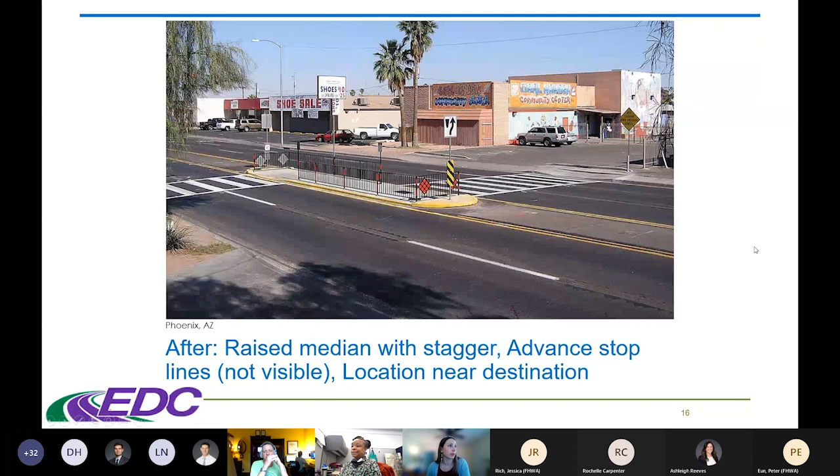Washington State DOT is an example of a state agency that has some specific parameters around medians that they like to implement. There's a low profile barrier that they like to use. This example, the angled median refuge island, is not something that's recommended, but in general, using this raised barrier is one of the examples to build your median refuge island into this median barrier.

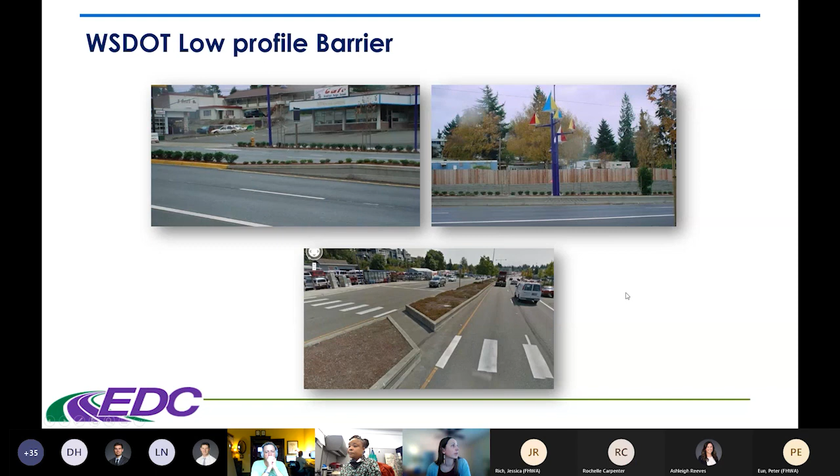There's just some standard drawings available from Washington State DOT, and you can see some landscaping here. Again, seeing those trees, you would want to minimize tall shrubs and trees on approach to your median refuge island to make sure the pedestrians truly are visible.

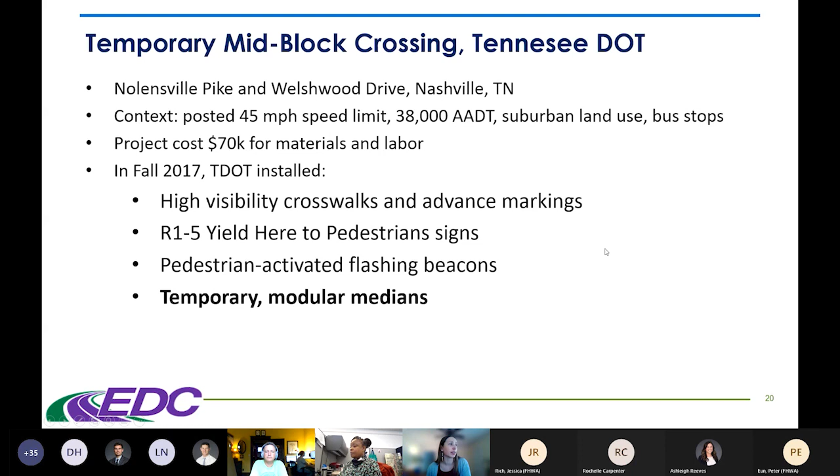As already talked about, there was the example of temporary mid-block crossing here in Nashville, and I'm sure you can ask Rochelle or some of the local staff about it for further detail, but we consider that to be one of the successful recent examples of implementing a median refuge island. It was paired with high visibility crosswalks, advance markings, yield here to pedestrian signs, and flashing beacons added at this location. It was temporary, and I believe one of the speakers yesterday mentioned it's been replaced with a pedestrian signal since.

From the ADA perspective, you want to keep the cut-through area for pedestrians flat at roadway level, so that's one aspect with specific guidance. As far as curb height, how high it is, whether it's mountable or not, I think there's probably different perspectives on that. You might want to consult your local Tennessee DOT roadway design guidance.

In areas with a specific presence of heavier vehicles, freight vehicles—like if you have a splitter island at the approach to a roundabout—there's consideration for whether freight vehicles can make that turn, but that usually applies to the circle island in the middle, not really meant for pedestrians. Heavy vehicles and freight vehicles would be one consideration for some instances where you'd consider mountable curbs, but for the most part I've seen them implemented as raised curbs.

Peter, do you have anything to add to that? Yeah, I was just typing up a long response, so I'm glad we're taking this verbally. I don't know of any guidance documents that says you have to go with one or the other, but typically we do like to recommend vertical.

Because with mountable or sloped curbs, vehicles will go ahead and mount them. I think it's similar to the application with sidewalks, where mountable curbs let vehicles get up on the sidewalk. So on pedestrian islands, having that vertical curb may discourage vehicles from mounting on top. It seems like a small thing, but there's always exceptions to the rules—in general, the default would be to do a vertical curb just to discourage vehicles from mounting it.

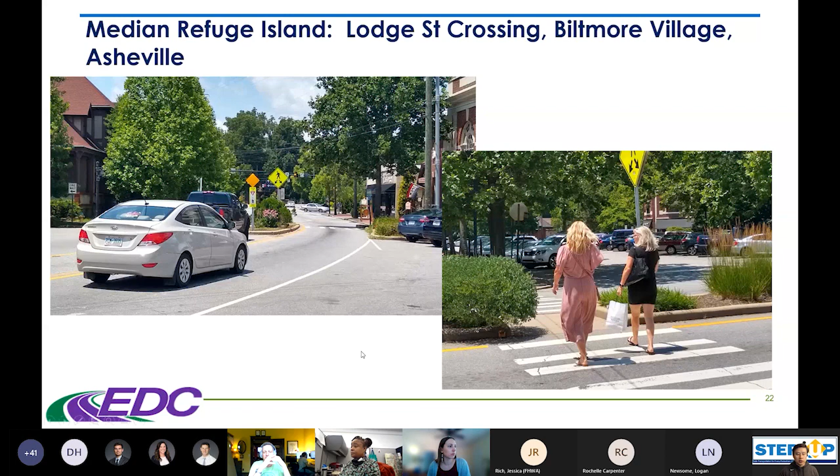Just a quick note about the vegetation in that other image - in Arizona, I think Tucson and Phoenix, they have some standards or guidance with regard to not placing any vegetation 30 to 50 feet in front of the crosswalk, just so it won't grow and the sight lines stay very clear. So there are some agencies that do have those standards actually written into their design manuals.

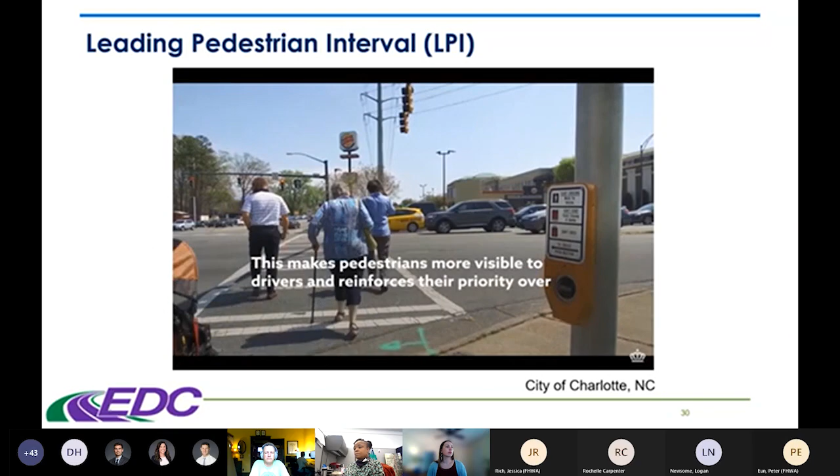In a rapidly growing city like Charlotte, it is critical to provide safe, convenient, and reliable transportation options. Part of that is making sure our streets are safe and accessible for people of all ages and abilities, whether they're walking, biking, or traveling by bus or car. For example, this includes improving intersections to help reduce crashes. One way we're doing that is by using a leading pedestrian interval, a new feature being added to select intersections. A leading pedestrian interval gives pedestrians a head start when entering an intersection. This makes pedestrians more visible to drivers and reinforces their priority over vehicles within the intersection. In fact, intersections with this system have been shown to reduce pedestrian vehicle collisions by as much as 60%.

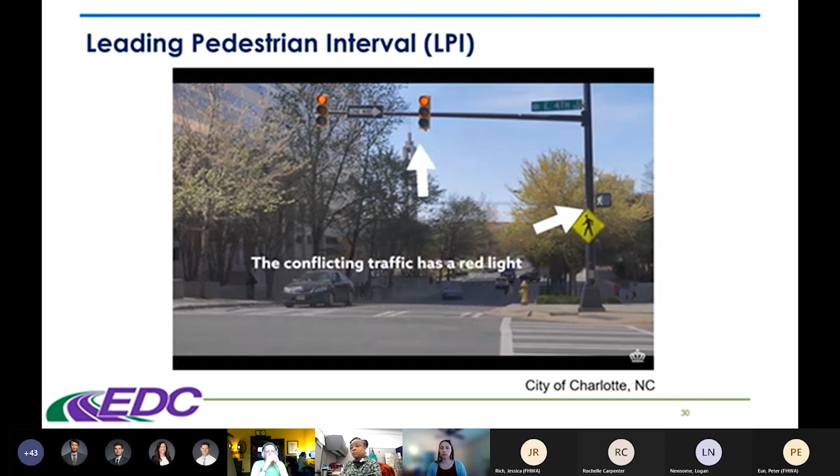Here's how this system works. First, pedestrians should always press the crosswalk button when available. This lets the signal know there are pedestrians waiting to cross. Then, pedestrians get a minimum 3-second head start entering the intersection. The conflicting traffic has a red light during this time. After the leading pedestrian interval, traffic going in the same direction is given the green light, and turning traffic yields to pedestrians who are already in the crosswalk.

At intersections where heavy right-turning volumes create additional safety concerns, a no turn on red sign may also be installed. This provides additional protection for pedestrians. The City of Charlotte is dedicated to finding additional ways to increase the safety of our residents when traveling throughout Charlotte. Learn more at charlottenc.gov/transportation.

Some considerations for implementing leading pedestrian intervals include hardware requirements. If you've had your traffic controllers replaced relatively recently, they would probably be able to accommodate this programming to include a leading pedestrian interval. If you have really old equipment, you might need to upgrade it. For example, a controller NEMA TS2 type 1 or 2, unit number 2070 or 270, should be sufficient to accommodate a leading pedestrian interval. But you might have some intersections with pretty old equipment where you'd need to upgrade to accommodate that. So that's one consideration, thinking about your hardware requirements.

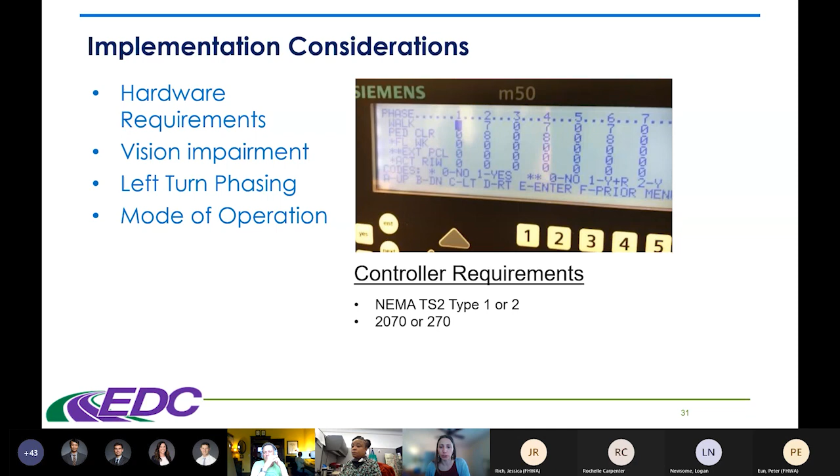You also want to think about your visually impaired users, what to do with your left turn phasing and mode of operation, and whether the intersection is coordinated for signal timing with other intersections on the same corridor. The MUTCD guidance indicates that at intersections with high pedestrian volumes and high conflicting turning vehicle volumes, a brief leading pedestrian interval, during which an advance walking person symbolizing walk indication is displayed for the crosswalk while red indications continue to be displayed to parallel through and turning traffic, may be used to reduce conflicts between pedestrians and turning vehicles.

Regarding visually impaired pedestrians, one of the things they would typically do at an intersection with a signalized crosswalk is listen for the sound of traffic traveling in the parallel direction. When the leading pedestrian interval is implemented, they can't hear the sound of cars moving in the same direction yet, because the cars are not yet moving. So you might want to consider whether it's appropriate for your location and context to upgrade your pedestrian signal to audible signals as well, to make it more ADA accessible.

Additional guidance from the MUTCD speaks to the duration - at least 3 seconds. But you also want to think about the width of your crosswalk, the length of your crosswalk, and the typical walking speed of pedestrians in your area, especially if there's a high prevalence of senior population. You're trying to time it so they can cross at least one lane of traffic. When there's a very large turning radius, you want to make sure pedestrians can travel far enough into the crosswalk to establish their position ahead of the turning vehicles.

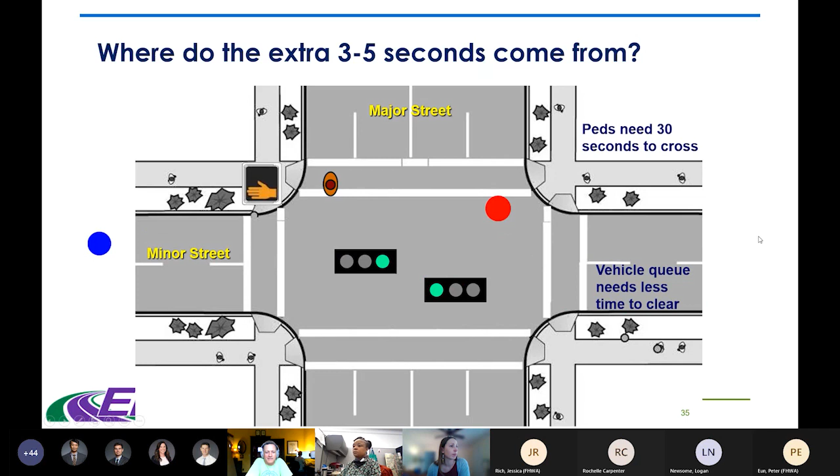In thinking about coordinating with other signalized intersections on the same corridor, you'd need to consider whether this intersection is in free operation, in which case the length can simply be added to the overall cycle, or whether it's a coordinated intersection setup, in which case you have to account for those 3 seconds or whatever timing you choose within your coordinated phase. In that case, the vehicular time on the coordinated phase will be slightly shortened.

Thinking through locations, anytime you have a high prevalence of left turns with a need to yield to oncoming traffic, and a pedestrian signal phase at the same time, you might consider LPIs. That particularly applies at T intersections, one-way roads, and probably a lot of downtown locations as well. It helps with visibility concerns, and with areas with high pedestrian volumes and a prevalence of pedestrian crashes. Consideration for proximity to vulnerable populations is another factor to take into account.

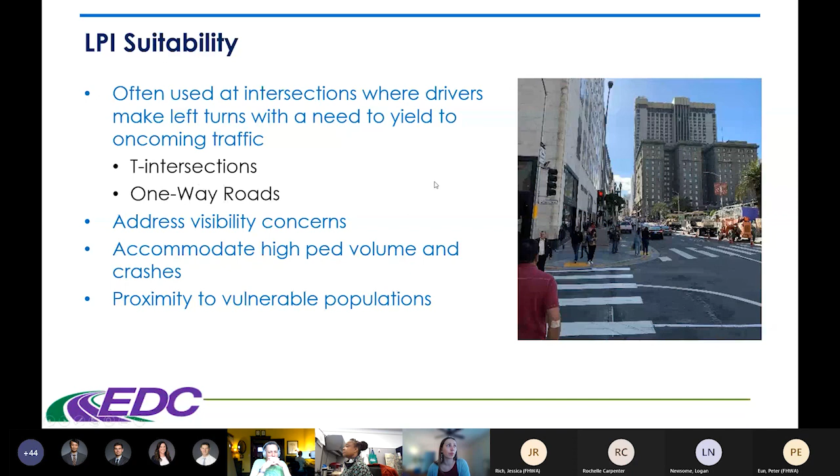And then you might have some additional location-specific guidance. For example, St. Paul guidance indicates that an LPI should be accompanied by a no turn on red restriction for right-turning traffic on adjacent streets, but it might need to be offset with a longer green time after pedestrian movement, and still allow time for those turning vehicles.

There's also guidance from St. Paul indicating that LPI should be used with a high visibility crosswalk, and accessible pedestrian signals should be considered when an LPI is used. So again, to help those pedestrians with visual impairment, if you have those accessible pedestrian signals with the audible indication, the walk sign is now on to cross X street, that really helps them too, because you can't orient for the sound of vehicles.

In Charlotte, the local guidance is that LPI intersections need to have APS installed also, so accessible pedestrian signals with that audible indicator.

A little bit more about operational considerations. So 3 seconds is the minimum, but you could go a little bit longer. In Toronto, their default is 5 seconds. In New York City, it's 7 seconds. And then you can use a formula to adjust for distance and walking speeds to make sure pedestrians have time to get far enough out into the intersection to be visible to the drivers.

In some locations, they're used in conjunction with prohibition of leading left turn, that would be Toronto and Boston, for example. In some cases, they're preferred to be used on a full-time basis, such as in Boulder, and some places in Florida. And then in some places, LPIs are paired with lagging left arrow, for example, in Alexandria. But other places actually don't allow the lagging left arrow in combination with LPIs.

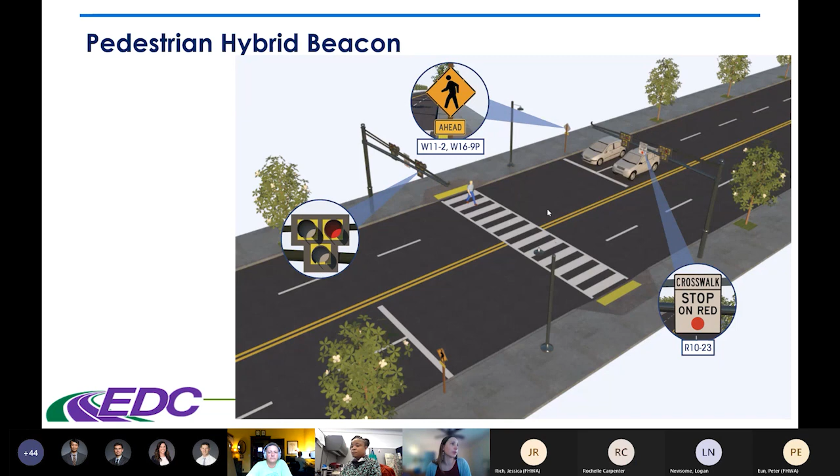A little bit more about the context when a pedestrian hybrid beacon would be most appropriate. There's still going to be situations on multi-lane, high-speed, high-volume roadways that are probably your commercial corridors. Maybe there's a shopping center on this corridor, maybe a transit line, where there's a variety of destinations, pedestrian trip generators. And the crossing location doesn't meet the signal warrant.

So maybe if you measured your pedestrian volumes during peak hour, there's simply not 100 pedestrians or close to the number that the signal warrant requires. And if you implement a marked crosswalk alone, even with a refuge island, it's just not enough. At the same time, you see crash data or complaints from the public showing that there is a pedestrian safety problem. That would be a situation where you'd consider a pedestrian hybrid beacon.

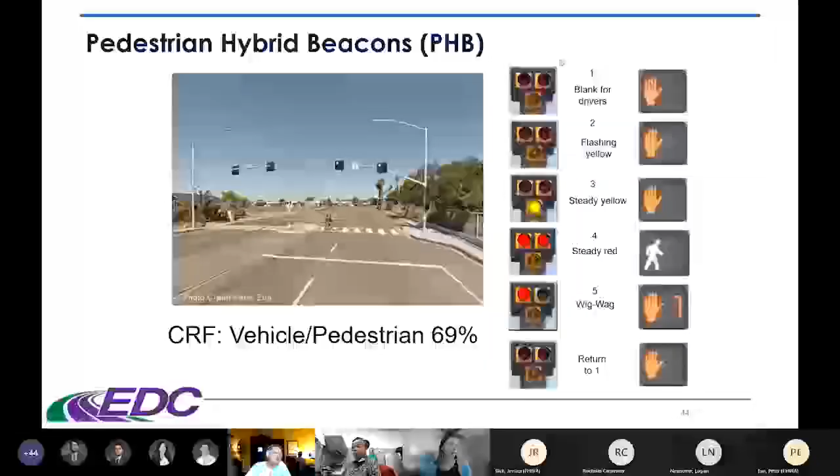This slide illustrates, as we reviewed yesterday, the phasing for the signal. It starts with a blank face until a pedestrian pushes the button to activate the beacon, at which point it goes to flashing yellow. Pedestrians still have the stop, don't walk indicator, and then it goes to steady yellow, so prepare to stop and stop. Then it goes to steady red, at which point drivers are expected to be stopped.

Then pedestrians get the walk indication phase. At that point, pedestrians would be crossing, and then the beacon switches to the wigwag pattern where the two lights flash across the top, indicating to the driver they might be able to proceed once the pedestrian has cleared the crosswalk. Pedestrians are seeing a countdown at this point, and then the beacon will return to blank phase. The pedestrian signal will return to a stop, not walk indicator.

The crash reduction factor for pedestrian hybrid beacons has been found to be pretty high, a 69% reduction in vehicle and pedestrian crashes. That's a pretty effective measure. In this particular example, it's implemented with a median refuge island in addition to the high visibility crossing markings, which is generally a good idea.

In some cases, you might not have enough roadway width to implement your median refuge island, so PHBs can be implemented with or without a median refuge island.

Some research on PHBs has been conducted. For example, 20 PHB sites were reviewed in an open road study. Driver yielding behavior to pedestrians was on average 96%, so pretty high yielding behavior. The study found that about 91% of pedestrians actually pushed the button to activate the beacon at those crosswalk locations. Speed also made a difference for pedestrian behavior: when the roadway speed was 45 mph or higher, more pedestrians tended to push the button versus roadways with posted speeds of 40 mph or less.

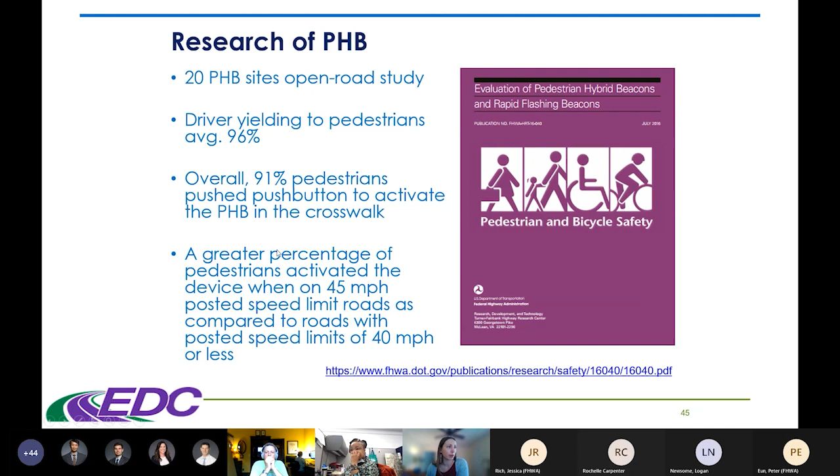Some additional guidance from the MUTCD suggests that when implemented, PHBs should be used in conjunction with signs and pavement markings to warn and control traffic. Try to make them as visible to drivers on approach as possible. There's also guidance that indicates a PHB should always be paired with a marked crosswalk, so you wouldn't want to implement the beacon without the crosswalk markings.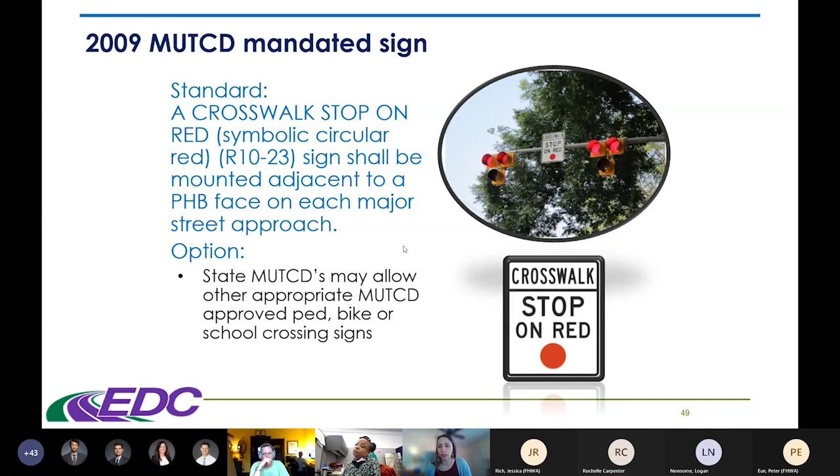There's also some question about whether or not pedestrian hybrid beacons can be implemented in an intersection. There's some guidance in the current MUTCD that when an engineering study finds that installation of a pedestrian hybrid beacon is justified, then the PHB should be installed at least 100 feet from side streets or driveways controlled by stop or yield signs. However, this is guidance, not a standard.

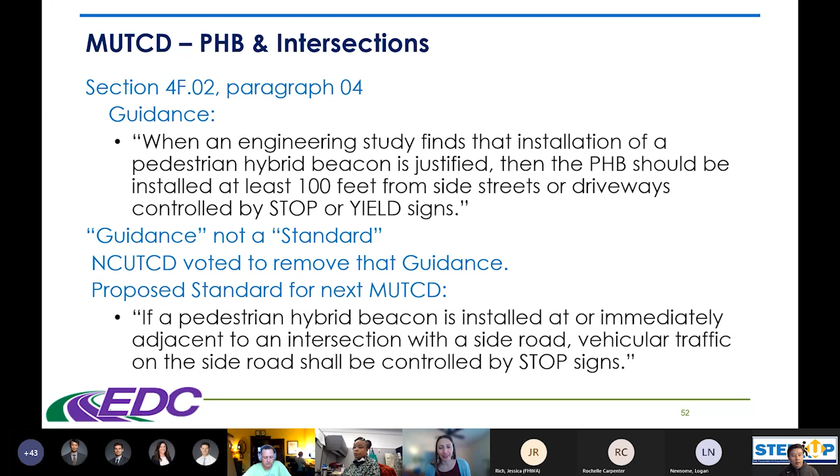Currently, there is a push to remove this guidance from the MUTCD, and there is a proposal to make the next standard so that if a pedestrian hybrid beacon is installed at or immediately adjacent to an intersection with a side road, vehicular traffic on the side road shall be controlled by stop signs. And Peter, feel free to chime in if you have any further news about the MUTCD, but I think our expectation is that that guidance will be removed most likely. Yep, correct.

Also, something to note is that one of the first jurisdictions to implement pedestrian hybrid beacons pretty widely was Tucson, Arizona. And in Tucson, they were actually implemented at local street intersections pretty frequently. So some of the state supplements have eliminated this guidance, including Arizona, for example.

Also, some of the locations in Charlotte where I've seen PHBs implemented are at intersections. So then you have a question about what do you do with the side street approach if they are implemented at an intersection. From the ITE Traffic Control Devices Handbook, there's some guidance that if a PHB is used at an intersection or driveway, then the PHB crossing and signal equipment should only control one crossing. So for example, if you have two legs of this intersection with a crosswalk across the main road, you would only implement the PHB across one of those legs, not both.

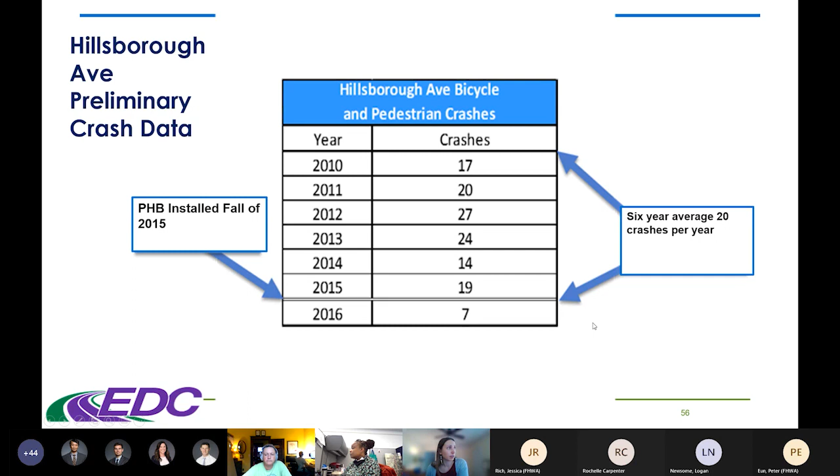Previously to installation, they were seeing on average about 20 crashes per year. After implementation in the fall of 2015, by 2016 this number of bicycle and pedestrian crashes dropped to 7. So they considered it to be a success. This was preliminary crash data, and unfortunately I don't have updated crash data in front of me for that location.

For example, both lights red would mean stop for pedestrians, flashing red is stop, and then proceed with caution if clear. Some locations have done little bus stop advertisements and billboards to let both pedestrians and drivers know about this treatment.

The study looked at driver behavior and pedestrian behavior. They observed the location for about 20 hours, during which 460 pedestrians and bicyclists crossed this corridor. There's an elementary school within a third of a mile, with a crossing guard typically present during school start and after dismissal. The speed limit is 35 miles per hour, with a 25 mile per hour school zone speed limit.

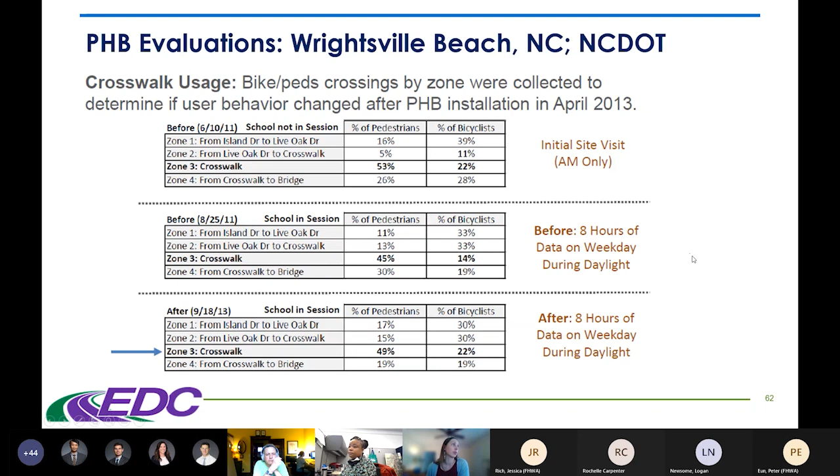They looked at this location and summarized the observation data into 4 zones, then examined what percentage of pedestrians and bicyclists actually used this crosswalk in addition to driver yielding behavior. They found crosswalk use increased from 45% to 49%, so more people were likely to self-select to use the crosswalk location with the PHB.

About 51% actually activated the PHB, and driver compliance increased from 27% to 74% during PHB activation. But even without activation of the beacon, when pedestrians did not push the button, there was still an increase in driver compliance from 27% to 36%. So having that additional signage and markings overhead just alerts drivers more that something is going on, and they're more likely to slow down and pay attention.

And of course, having a crossing guard at that location also helped with driver and pedestrian behavior. The crossing guard would actually push the button to activate it when there was a group of pedestrians approaching.

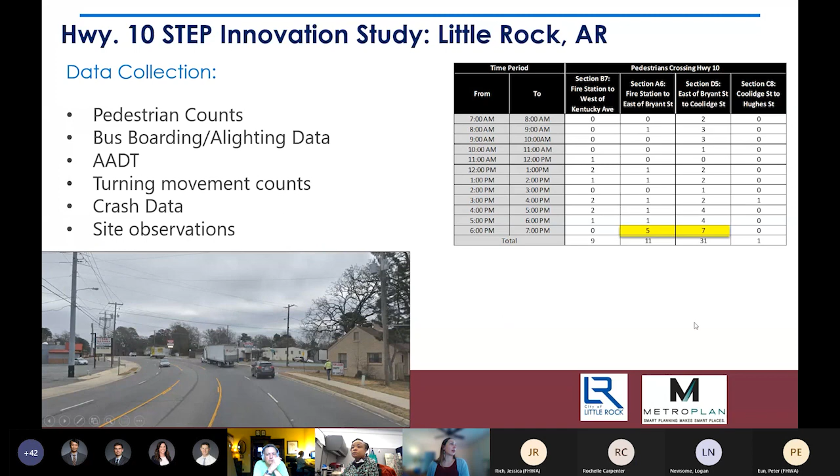There's one more case study in Little Rock, Arkansas, where they looked at before and after conditions again. They examined whether different locations along this corridor met the criteria for implementing PHBs, whether there were sufficient available gaps in traffic, looking for an average of 1 gap per minute, or 60 gaps per hour.

One of the locations met their guidance and one did not. They also looked at the pedestrian signal warrant to see whether those locations would meet some of the signal warrants. Warrant 6, coordinated signal system, was actually met at one of the locations. So even though it didn't meet the pedestrian volume warrant, it met a different warrant, and I believe they decided to go with signal implementation at that location.

This illustrates a bit more about one of the locations where they had bus stops with benches and shelters. This is the location of the crosswalk, where they added high visibility crosswalk markings, a traffic signal, and pedestrian accommodations. They also upgraded the bus stops to add benches and shelters.

So I think that's all the information on the PHBs that I have. I wanted to pause and see if we have some discussion on this before we jump into local case studies.

But you do know that at certain locations there is a pedestrian demand. Yeah, we do have latent demand data, we do have access to that. But I was wondering, if you're looking to implement a PHB, how do you decide on that at a certain location if you don't have access to pedestrian volume data?

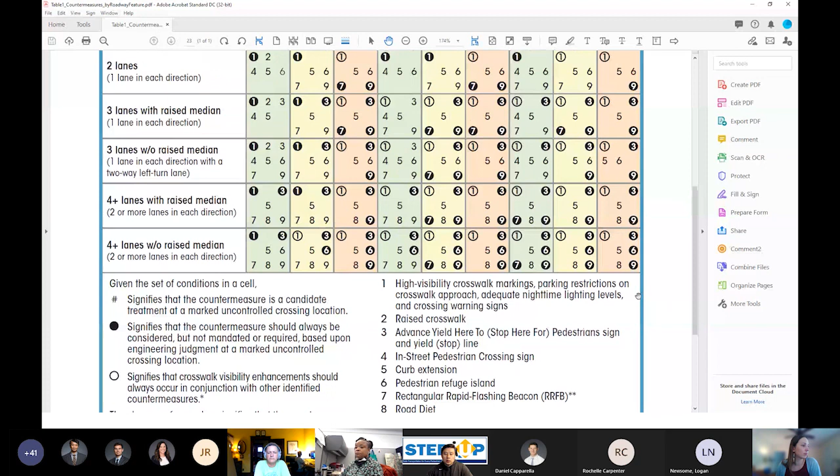Oftentimes you can go out - a lot of agencies will do those counts, maybe by person, depending on what resources are available. But if you have latent demand, you can note that in the engineering study, showing confidence that if you put in a PHB there would be that demand. That's one issue with PHB guidance - the requirement of 20 pedestrians per hour - because a lot of places people don't want to cross at these locations since they're multi-lane, high speed, and they feel at risk, so they only cross if they absolutely have to. So there's a lot of latent demand, and if you note that in the engineering study, we often see that after you put in a PHB, it usually meets those volumes or even higher.

It's the same way as the great example I always repeat - how many cars cross over a bridge before the bridge is even put in. In the same way, you can do origin-destination analysis, or look at whether people are crossing at a certain location consistently. Other times, people will do surveys in a neighborhood and ask, if we put in a traffic control, a PHB or RRFB here, would you use it? So you can do neighborhood surveys as well. Since you already mentioned you have latent demand data, this is more for the benefit of others who haven't done that - those are different ways you can get that information.

Thank you, Peter. Trying to see if there's any additional questions.

A comment from Robert about the problem of adjacent side street traffic control, artificially generated by the warrant requirements for full traffic signalization: if pedestrian safety was prioritized, fully signalized crosswalks would be installed based on ped safety, and there would be no problem with side street control. Thank you for that comment.

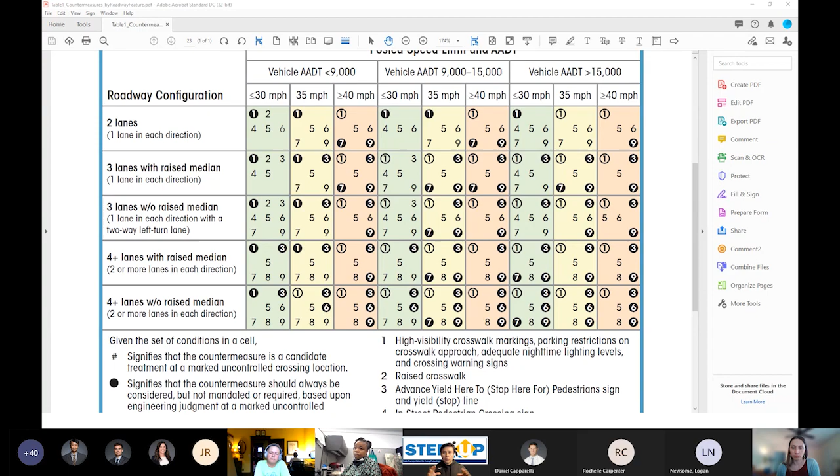With regards to warrants, that's one thing we've heard discussion about - the possibility of getting rid of warrants altogether. I don't know where that will go - this comment period would be a helpful place for people to make those comments. But I will say it is a challenge - if they got rid of warrants and had no pedestrian volume requirements for signals, you may end up getting requests for every intersection, or a lot of intersections, to be signalized.

That's where STEP treatments are really helpful, because sure, there are locations where a signal would probably be ideal, but signals are not a guarantee as far as pedestrian safety. Sometimes a good design at a mid-block with a PHB or RRFB could actually be even more effective and efficient for all modes. And that's the thing about engineers - at most places I've gone to do these workshops, it's not that engineers don't want to do some of these things, but they've got a job of trying to balance all the different users. So understanding the different sides and the needs really is helpful.

But with the PHB, it does provide a lower threshold, and you can put it at an intersection. You want to do that study and justify why you're doing it, and it'll be easier in the next edition as far as the recommendations go. But it does not control that intersection.

I think in the past, historically, because of half signals - which at an intersection stop control the side street while the main roadway has a signal - there have been traffic crashes with vehicles. Maybe it's been a while and I don't know if drivers are getting better with that, but we don't want to make something more unsafe for one mode to make it safer for another. We want to try to make sure we balance all that out.

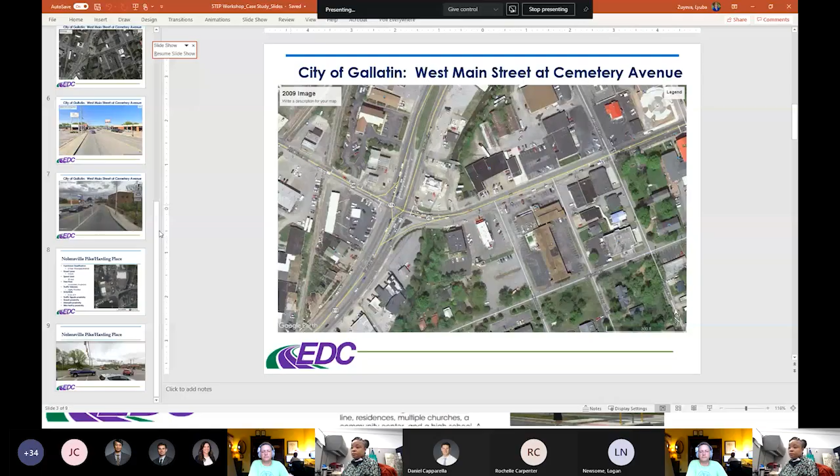That intersection, because of the unusual angle, has a pedestrian push button on the northwest corner that always gets clipped by large trucks. Large trucks turning from Highway 31 onto Highway 25, marked as 174, have difficulty making that turn and encroach into the radius of that sidewalk.

We have made arrangements to try to fix that at a future date, since this business changed from a service station to a payday loan, to identify an area where we could acquire additional right of way to move and widen that radius.

Of course, that's good and bad depending on which way you look at it. But this put pedestrian improvements in on all three legs, just not the south leg of the intersection. So someone walking along the south side of Highway 25 who wants to continue on Highway 25 has to cross three different legs of the intersection, in addition to that free-flowing lane. But it does now have pedestrian improvements.

Now, one thing that happens also, because the Krystal is an attractor for people, and there's a Wendy's just to the east of the intersection, is that we have people who want to cross Highway 25 who aren't willing to double back and use the crosswalks. They'll just walk across the neck of the intersection, somewhere between the Krystal and the Wendy's, maybe a couple hundred feet east of the intersection, just jaywalking across at that point.